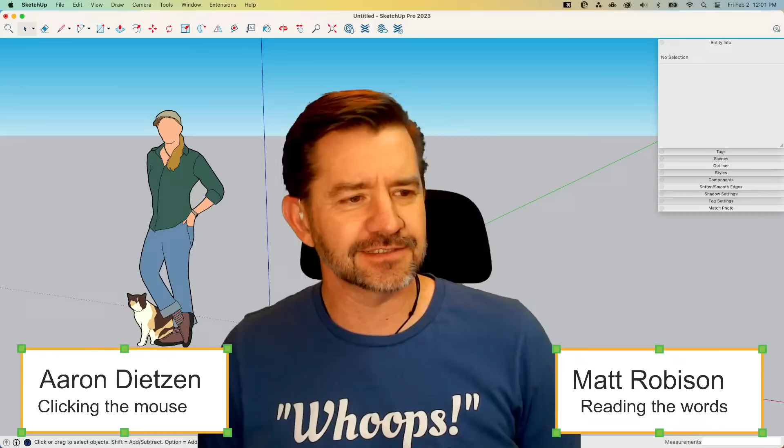We were just commenting how the first comment we saw come in was 'Hello from Madagascar.' I don't know why that staggers me, maybe because it's the movie, but Madagascar, that's pretty sweet. We've got Madagascar, Turkey, Syria so far. Let us know where you're coming in from. Iceland, my gosh, you guys are tuning in from all over. I'm coming in from Michigan over here. It's awesome, thank you guys for hanging out with us. This is gonna be fun.

We're gonna mix it up a little bit this week. We've been doing some architectural modeling, some interior stuff, some exterior stuff. Eric did some landscapey kind of stuff last week. So what would keep you guessing? We're gonna do some more entourage modeling, product modeling. We're gonna model an espresso machine, industrial design, product design kind of thing. It's an espresso machine.

If you saw the thumbnail before or the forum thread, you saw this ain't your regular espresso machine you might see out there. This is like a fancy one. It's got all kinds of shine to it, though I guess most of them are shiny, that's not the main characteristic. It's brass, very brassy. It's very cool and kind of ornate, like a statement piece. I feel like this would be a centerpiece of this coffee shop that Eric and Tyson have been working on collaboratively to bring together. I'm excited to see it come to life, it's gonna be fun.

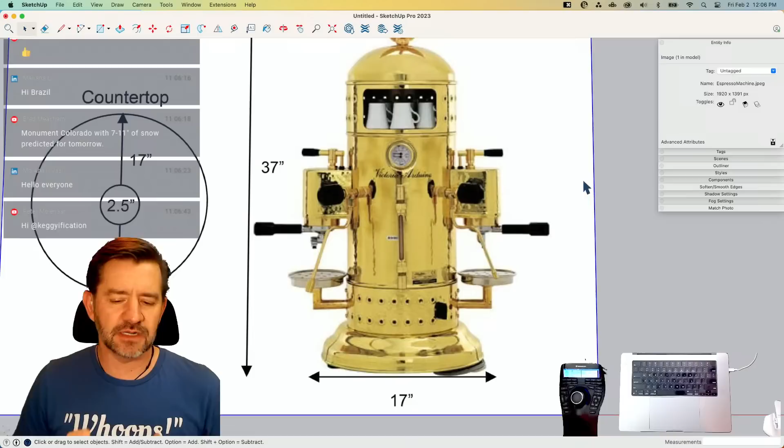The goal here - we talk a lot about level of detail, like how much detail do you need in a model? One of the biggest problems people run into when they start modeling is they start going to a super high level of detail, putting in circles with 999 sides, super fine minute detail when it's not needed.

So like Matt said, the goal of this piece is kind of a centerpiece - to have this piece be something that would show up and look good in a render. So we'll put this into the back of the coffee shop, and maybe Eric will go do some V-Ray renderings where you can see it real well from behind or from in front. We'll see, something like that.

But we want a decent level of detail because we want it to render fairly nice. It's not like a piece of fruit in a bowl on a countertop that's this big on your screen - this is actually potentially going to have some rendering done. So we want to go a little bit higher level of detail, but I do want to be conscious as I do this not to overwhelm.

So if you look at this thing, first thing, we've got a lot of round surfaces - awesome, that's cool, we can do that. We don't necessarily need every circle to have 100 sides, but we might want to bump to a little bit higher number just so we keep it smooth, so we don't get weird angles or chunky edges or anything like that. So that's something we're gonna keep in mind.

The other thing, I'm going to point this out up front because you guys watch this a lot - you probably know I don't do a great job of this. Usually I'm halfway in before somebody points out the thing you're modeling is symmetric, and I go 'oh yeah.' I'm going to do it up front this time - we're going to model half of this thing and let the other half just show up automatically. So there's some stuff that's not symmetric: there's this little pressure valve right here that's not going to be the same on both sides, and looks like there's a little switch or toggle right here that's only on one side. But for the most part, a lot of it is going to be the same.

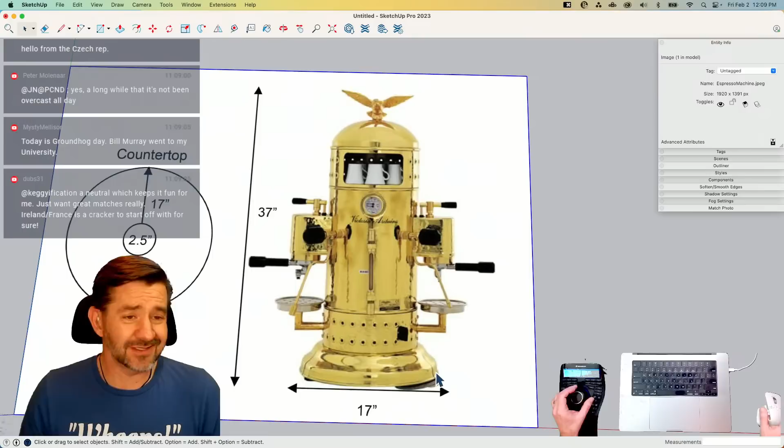I do have some dimensions here - it's 17 inches, I assume inches. Yeah, inches, the two little dot marks, that's an inch. 17 inches wide. I don't know exactly, but yeah, I'm not going to model it at that - I'm going to model it pretty big, so this thing's going to probably start out about people-sized, and then I have a number I can scale it to afterwards.

Again, this is not for fabrication, this is for rendering, so I'm not too worried about exact dimensions. I want something that looks about like this and is going to render well. So that's my plan, that's what I'm saying I'm going to do as of right now. Sound good? Everything good?

Modeling at somewhat of an arbitrary scale, just big enough to avoid not being able to create any small faces, and then afterwards you'll use these dimensions to scale it. You're not using like a scale factor of 100 or whatever, and then going back down.

Right, exactly. If there was some part of this that I was going to model, like if I knew the size of this copper tubing right here, if I knew that was a specific size, I would be more intentional about modeling to some scale. But really, I don't have any number. I don't have any clue what anything is, so I'm just going to jump in and make the shapes correctly.

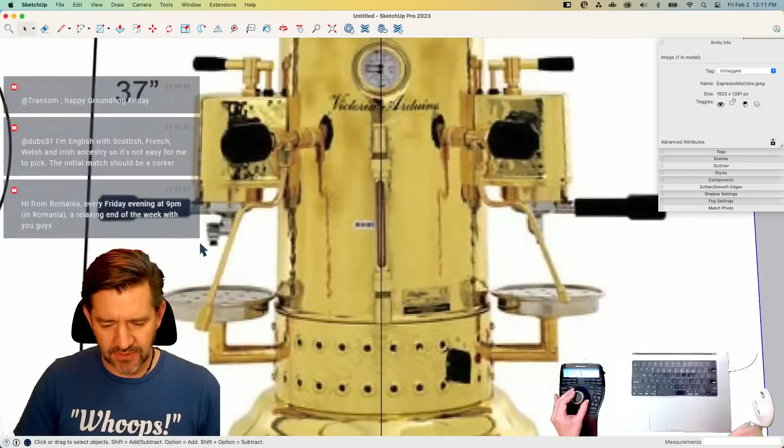As I come up here, it does look like maybe the image isn't quite straight. That's okay, for our purposes not a big deal. We're going to make a thing that looks a lot like this, and we're going to do it right now.

I'm going to draw half of a flat profile of this entire thing, and then we're just going to do a follow me, starting with the big overall shape. We have a lot of details to come in and add on here, so I want to get this main shape in right now. So I'm going to come all the way out like this.

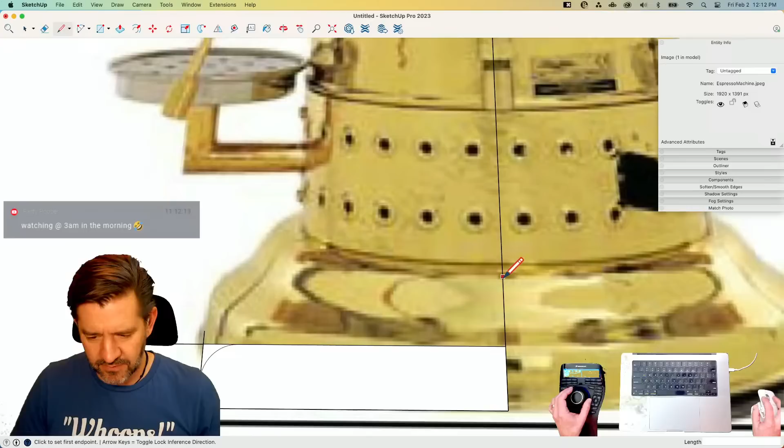Looks like there's this little rolled lip right here, so I'm just going to draw that kind of like that, and then it looks like it goes up a little bit. So what I really want to do is use these lines right here—that's kind of where this starts to roll down. See that? So if I go up like that, then I can put an arc in here, like that, and then that rolls up like that, and then it kind of goes in and rolls out again. Here's the top of that where it rolls back out again.

I gotta say, this is like pro-level eyeballing it. Oh, this is sometimes like when I do a follow-me profile—I think okay, I have a good idea of what this looks like in cross section, I can model this from the image. And then I do the follow-me and it looks completely wrong, and I'm like, oh gosh. But I guess that time could perhaps come for this particular base piece.

But we got time, we can make a mess for sure, but I trust you and your experience doing this enough times that you have a good idea of what it actually looks like and how to do it. Well, thank you, I appreciate your faith in me. Let's see what I can do to dash that. No, I'm with you 100%, no matter what happens—I'm one of the positive co-hosts.

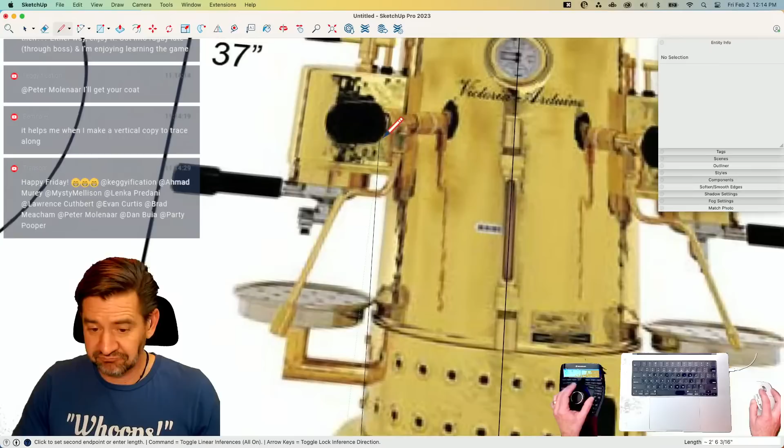I like that, yeah. People in the chat are saying that today is indeed February 2nd, meaning it's Groundhog Day. So happy Groundhog Day to you, Aaron. Thank you very much, I had no idea that was the case. Well, you're right, I don't pay attention—a bunch of people mentioned it, so keeping you up to date on current events, so you can have stuff to talk about at dinner parties over the weekend. Nice, nice. So you didn't even know it was Groundhog Day, so you probably don't know the result of Mr. Punxsutawney Phil's venture out of his hole. No clue whatsoever. Wow.

Does anybody in the chat keep up on Punxsutawney Phil over there?

If you're not familiar with Groundhog Day, it's a tradition in a specific town where they have a groundhog, a rodent, come out of his hole in late winter. If he sees his shadow, he's scared and goes back into his hole, meaning there's going to be six more weeks of winter. But if he's not scared, that means there's going to be an early spring.

I personally like Groundhog Day because there's still some whimsy that exists in the world, you know? I get what you're saying there. Outside of that is a lot of cynicism and facts. I went straight negative, I don't care for it immediately. Matt's more positive than I am, yeah.

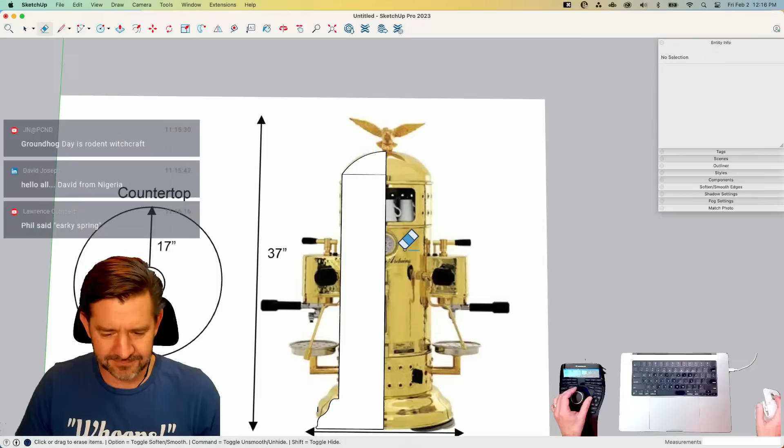But yeah, this kind of flights of fancy that still exist in small towns in Pennsylvania. Also, probably most people didn't realize that we have control over the changes of the seasons in Pennsylvania. So who knew, huh? Yeah, it's like whatever, germinating clouds so that it can cause it to rain or whatever. It's not that sophisticated, but still the same idea.

All right, so I got a pretty good outline here. This is, again, like Matt was teasing me about next level eyeballing, but this is what happens especially when you take a good up close picture of something that's 3 feet tall. This is parallax, right Matt? Where the tops and bottoms kind of tip away.

Oh, it's a P word. Parallax is like moving when you move laterally, left and right. Is that okay? I don't know, maybe it's the same thing. I don't know. I had one shot at sounding smart and I blew it. Sorry, I stomped all over it. It could be right, I believe you. No, I have no idea what I'm talking about. I honor my ignorance.

But no, when you do take a picture of something that's fairly big, stretches more one way or the other, you do get this kind of falling off. So I'm not looking straight at this. If I wanted to look straight at this, I'd have to pull way back and then zoom in to prevent this, so this was like straight flat towards the camera. So you can see I have this rounded part like this, and that just happens. That's how we see things.

But if I come to the very middle, what I was doing there is just saying okay, about here is where the top of that rim is, draw a line over. I created a grid where these changes were, I thought, and put them over here on the side. That's basically what I went to, and I'm hoping when I follow this around a circle, I'm going to end up with a bell shape at the bottom similar to what I got in the picture. As I come up here, I'm not lining up exactly because this picture's not perfectly square, but it should be fine for our purposes.

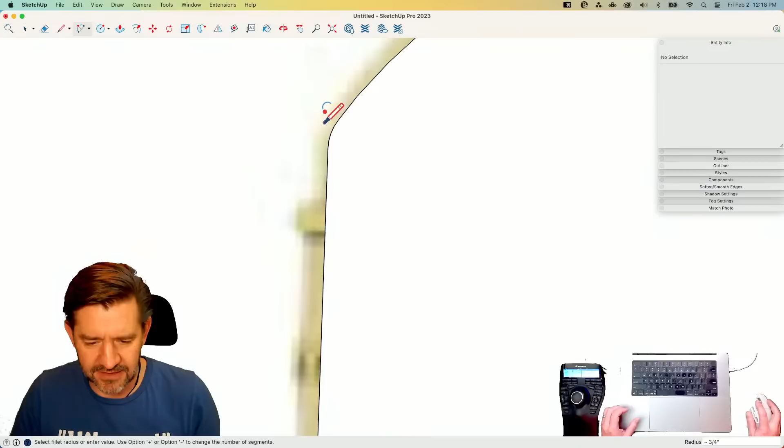I don't like this sharp corner right here, so I'm gonna make another arc. Default is 12 sides, I'm gonna drop down to like 4 sides, and just do a real tiny arc like that, just to take that edge off, so I don't have that real sharp transition right there.

The other thing I did was when I drew this arc right here, I put a reference line across like this, and that allowed me to pull an arc that was tangent to that line. That's real important, because if you don't do that... let's just recreate that same geometry right here. So I'm going to draw it again. If I wasn't careful about that, I could get something, whoops, let's go back up to 12.

I could get something like, oh, I think that's about right. If I spin that around a circle, it's going to be at a sharp point. And if I go up too high, it's going to create a dimple instead of a nice flat transition at the top. So just a couple tips if you're modeling that kind of geometry to make it look nice.

I have two sections here where the metal steps out. It looks like I have another little lip here, and inside of that a separate ring set in. That ring has these little dimple holes around it, one at the top and one at the bottom. So what I think I'm going to do...

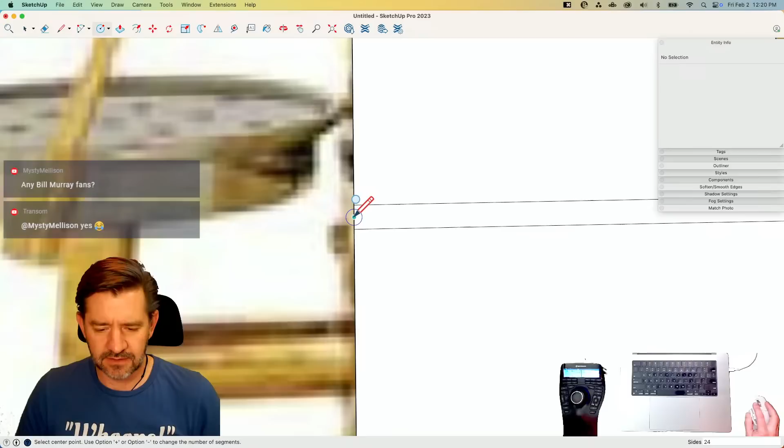At this point, I'm going to do this once so I can copy this geometry. I want to put just a half circle on there. When I do circles, I like to inference the middle right here, and then pull it up, and there we go. That simple. I can grab that, option copy it, drag it up, and stick it right here.

Now I have a question: is there any benefit to doing a circle and deleting half of it versus doing an arc in that situation? So let's try an arc on this side.

So say I did an arc, come like this, click here, and pull it out. There we go.

The only difference is in this case it's a little easier because I don't have other geometry getting in the way. But then I have to move my mouse just right to inference a half circle, whereas with a circle, I just click and then delete this line anyhow. So dragging across both is about the same for me. That's just the thought process I got into.

If I did want to do the arc, click here, here, and then bring it out to inference a half circle and then erase. So it requires being a bit more precise with the mouse movement. I can be a little quicker on the model by just clicking, but it's pretty close to the same, I'd say.

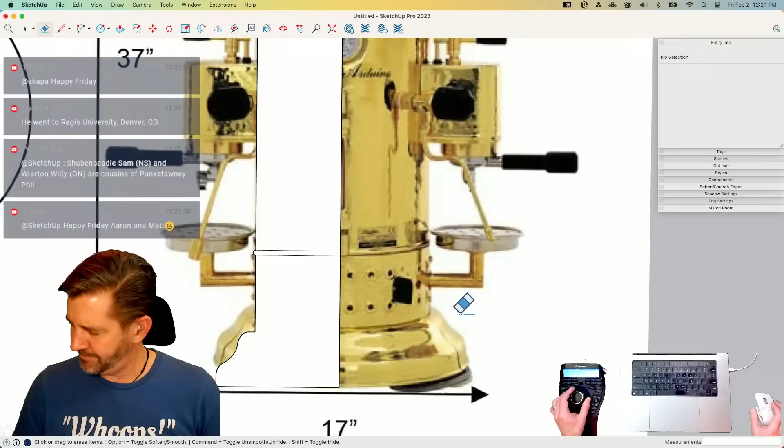Okay, cool, thanks for showing that. Absolutely. Two things: one person asked why you're not using X-ray mode to trace, or would you use X-ray mode to trace in this case? I'll let you answer that right after.

Shouts to Doug and Lawrence, who correctly said that Punxsutawney Phil did not see a shadow, so there's going to be an early spring. We haven't had winter yet here, so I'm not exactly happy about that. It was 60 degrees yesterday. February is supposed to be our coldest, snowiest month, and it was 60 yesterday. So fine, I guess we'll skip that. Who needs four seasons anyhow? You're already on to early spring. Phil's kind of cheating, he's just saying my prediction is that it's already spring. He's just refreshing AccuWeather and saying, okay, this is an easy one. Don't you guys have the app?

All right, so what I think I'm going to do: this section and this section, I'm just going to leave for now. I'm going to get the main body in, and then come back and replace this piece and this piece with different geometry. We've got to talk about how we're going to put these holes with the lips around them, but other than that, I think this will be the body of my piece.

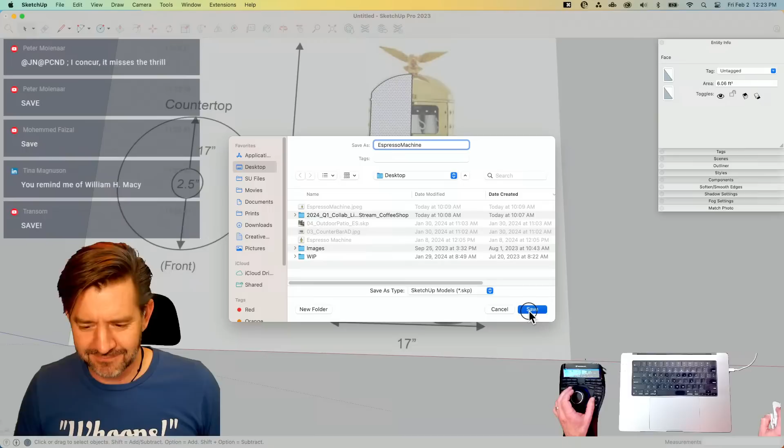He's a popular actor. Yeah. I'm just not sure I'd take it. I'll take it, I'll take what I don't know. Seems like a nice guy.

All right, put a circle right here. Now with this, like everything else I did, I used 12-sided arcs and 24-sided circles. I think that's going to be enough detail. But when I actually talk about taking this piece and bringing it around a circle, I do want to go to a higher number. 24 sides is okay, but when I blow it up to 17 inches wide, each of those segments is going to be like a full inch, so it's going to be a little too big of sides. So generally I try to use circles that are increments of 12, or at least of 4.

I'll usually use 24 as a standard. If I want higher density or higher detail, I'll go to 48 and then 96 — those are usually the three sizes I use. I use increments of 12 because they're divisible by more numbers than increments of 10. An increment of 10 is evenly divisible by 1, 2, and 5, but 12 you can divide by 1, 2, 3, and 4, so it's a lot easier to break up.

So just a thought — I'm going to try it at 48 because I want to keep it fairly light. I'm going to throw a circle down here... well, that's not where it's supposed to be. Let me try again, right here. There we go, and it doesn't really matter. So I'm going to grab that ring, say follow me, click this, and look at it a bit to see if that's the right level of detail.

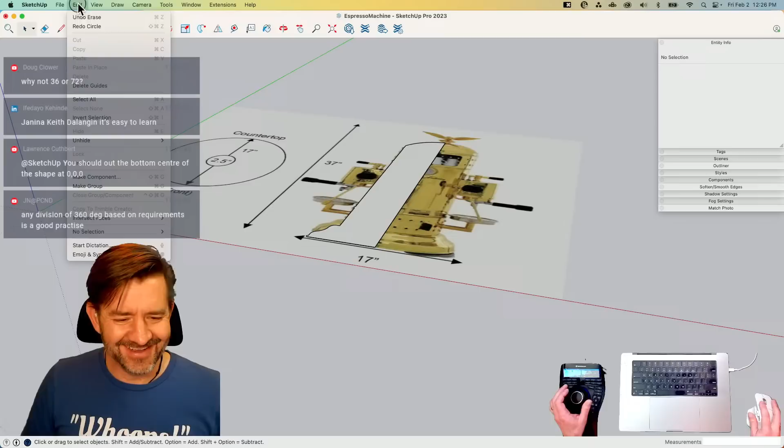So I'm going to hit undo — oops, or save. I'm going to save it, command S as opposed to command Z. They look similar, just kind of reversed, just backwards, yeah. I'm going to grab that circle — I don't have to draw it again. I can just come up here and say, all right, make that 96 instead, which is 2 times 48.

Now I'll try again. I'm going to grab that, follow me, click here. Look at that — that looks way smoother than it did before. So I like that, again, if it wasn't the whole body.

The other thing about this is we're going to put something shiny on here, and I guess I should defer this to Eric because he's the guy who does the most rendering. I feel like with shininess, issues like that stand out a little more.

All right, I can get rid of the circle, and I can take this and shove that over there.

Are you watching the preview, Matt? The preview, what do you mean? On Restream? I have it up at this other window, and it just jumped back to like the first couple minutes of the stream. Oh, it's still working here, right? All right, it's just me. It's still showing me the live view. Okay, just me, just causing problems. All right, so now... yeah, let us know in the chat if anything goes wrong, but I think everything's good. Still right, as is, yeah, as expected. 30 minutes in, and we got this. Uh-oh.

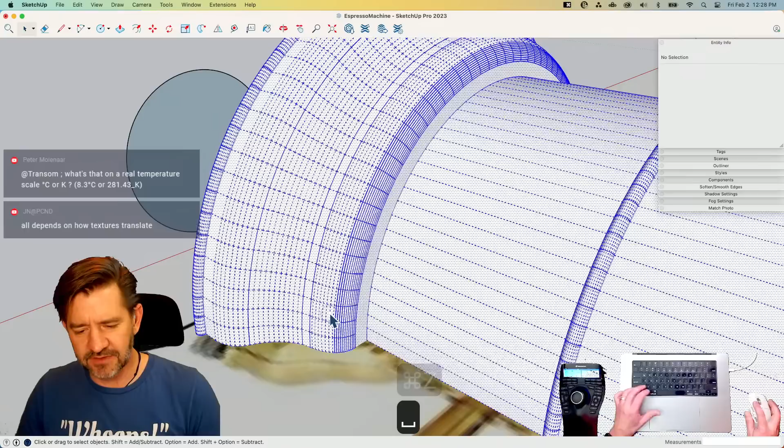I jumped, let me undo a couple times. All right, so see this right here? This is showing that I didn't have some geometry welded. It would be easy enough to come in and erase some of this stuff, or triple click and soft and smooth it, but I am trying to do this as correctly as I possibly can. So I'm going to come in here. How many undos did I do? Too many. And I am going to do some welding.

So I want pretty much everything from here to here to be a single curve. All I have to do is select it, right click, say weld edges. Now if I click off of it and grab it again, I should get one continuous curve. So when I come here, select here, follow me, click here, and spin around — there we go. That's nice, see how it just looks like one big piece.

That's what I want. I didn't have to do that for these because they're already individual curves. Same thing up here — oh, I did get that one I missed, so undo one last time. Let's select that, right click, weld. Now we have one curve up here, one curve down here — now we're good. I can select this, follow me, click here. All right, that's what I wanted. Perfect, okay, nice.

And save. All right, slide this over here. I think the rest of this is going to start going pretty quick. I just got to stop. I got to talk less and model more.

So I'm wondering how many holes I want to do this section here. This section and this section have these series of holes going all the way around. So if I count, 1, 2, 3, 4, 5, 6 - say there's 24 sets of holes all the way around. That's what I'm going to go with.

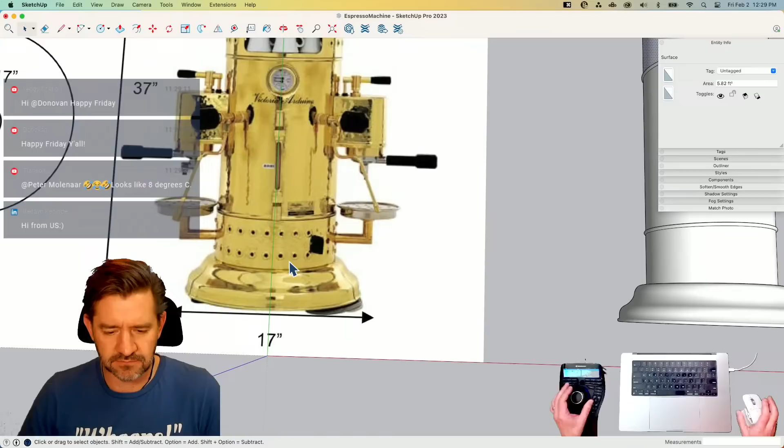Drawing holes onto things can be a little difficult. The reason is when you draw a hole on something, you need to draw it onto a single face. If I go view hidden geometry, my single faces are pretty small. So I'm going to just draw a circle right here, inferencing about the middle.

Pull out to about where the circle is, and then do another one, pulling out to where that lip is. I'm going to grab that, make it a group. Now I'll grab it by the center, bring it over here - I'm not actually placing it, I just want to use it as an inference. You can see when it's on the center, it almost perfectly fits inside of 2 sections.

That's actually kind of good to know. That's really good to know. So what I'm going to do is have that hole pierce 2 pieces.

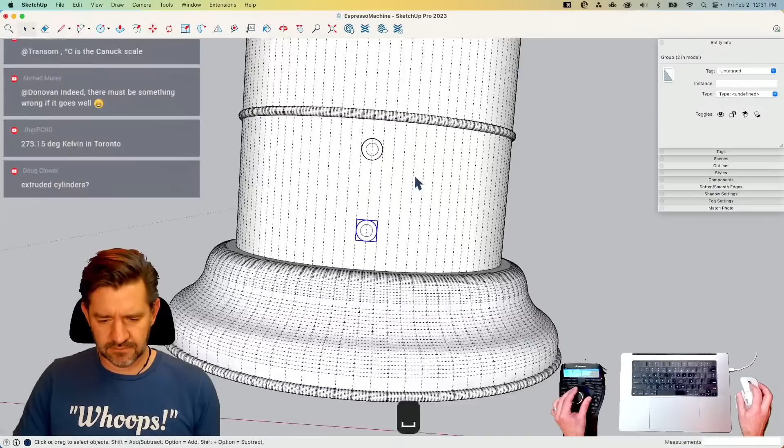Let's see, I'm going to move it up here, a little lower, and step back with that. Down a little bit more. All right, so it's not where it needs to be right now.

It's a little bit off - it's right in the middle. You can see here if I look at my middle line, let's move it so our origin line is right about in the center. So pretty close, it falls on either side. That means what I'm looking at right here actually needs to be hitting right here, 2 segments over.

So what I can do - let me think of how to do this. I'm going to grab those 2, use rotate, find that center segment, and just drop a line straight down. That didn't work, it didn't go straight down, it came straight out.

All right, so if I grab these 2 now and rotate from the middle of this, I go from here, option - I'm copying it for right now. I'll get rid of the original. I think that works.

And here's what I'm gonna do. I'm making this up - like I'm saying these things as if I have a plan, but I'm not really sure what's happening just yet. I think I'm going to isolate this into its own group, come into that group, and make this into just kind of a dowel sticking out.

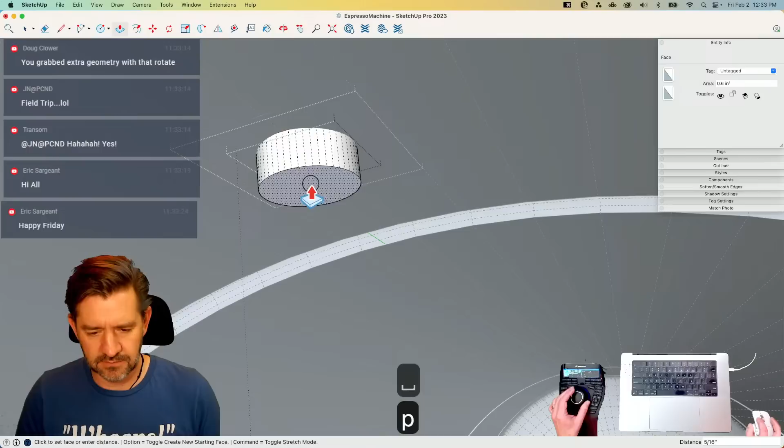All right, that's going to work. Except I want to separate this, so I'm going to grab this circle and make it a separate group.

And if I'd made this a component - somebody should have said this out there, maybe they did - I should have made that a component first because I would have only had to do all that once. Now I can grab both of these and explode them. Now I have separate 2 dowels and 2 ring shapes. I'm going to come back to the ring shape later.

Right now, I should probably triple click this and make it a group. And let's see - if I come into this one, hide the rest of my model, select these 2 faces and say intersect face with model, I should get that.

And now I can take just those 2 circles, rotate from the middle, go here, option, every 2 - it would be every 4, and say 23 times.

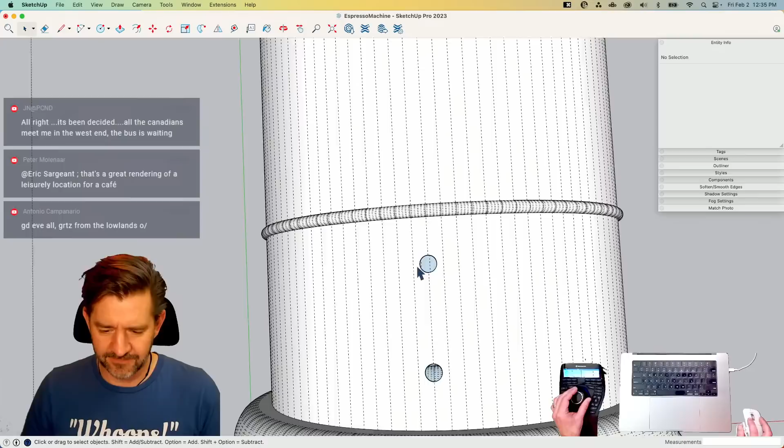Let's try that. I'm going to do some precision selection. Shift. All right, so now I have just those two circles.

Nothing else selected, double check inside. Okay, let's try rotating that. So we're going to go from here. Option 1, 2, 3, 4. 23x. All right, I think that did it.

So if you copy a circle onto a single face, it will cut it, and you can potentially not have to come around and delete this stuff. But I didn't do that, I copied it onto a break. So what I could have done, and I'm just thinking through stuff as I go, is actually copied these two faces and just copied them around.

Then I wouldn't have to come in and delete this geometry, but I didn't do that. Sometimes my modeling muscles go quicker than my thinking muscle, which is what I like to call my brain. Yeah, sometimes I just go and do stuff, and then afterwards... have you been here before? I'm not explaining anything new, you know what I'm talking about. Whew, stop, coffee break. Yeah, totally.

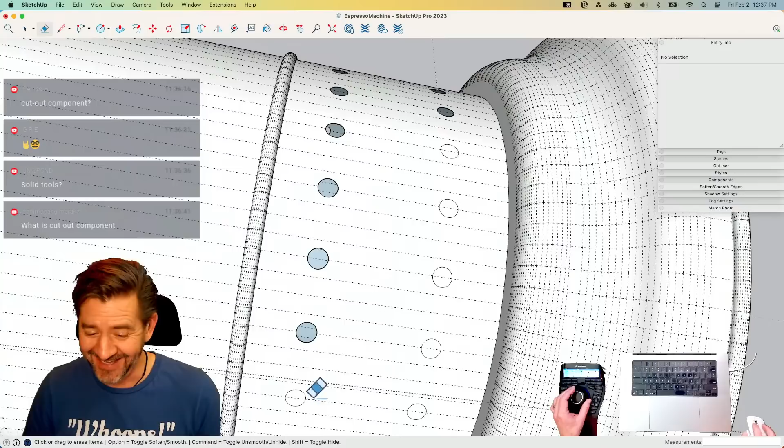Speaking of that, I know you kind of had plans early to do this as a half of a component. Oh yeah, I don't know if that's still coming, or if that's the plan or not. Hey, that was in the plan, you're absolutely in the driver's seat, so that's up to you. Yeah, I was going to do that right now. I was not going to do that right now. Thank you, Matt, now's as good a time as any.

Yeah, okay, so how do you go about breaking stuff in half? We did a video a while ago talking about splitting things in half.

I could do this a couple different ways, because I could come in and come up with a cutter to break this. This is a symmetric thing, right? The geometry already exists. So what I would be tempted to do, rather than creating a cutting geometry or anything like that, is just to kind of do something like this and just brute force chop it in half. I think it's kind of fun, it's kind of like reverse stitching.

But this way I can actually just come through here, erase what's on one side. All I'm really looking for here is a good solid break. So if I erase one segment all the way across like this, then I can actually, after I'm done, just do a quick select and then erase half of it real quick and easy.

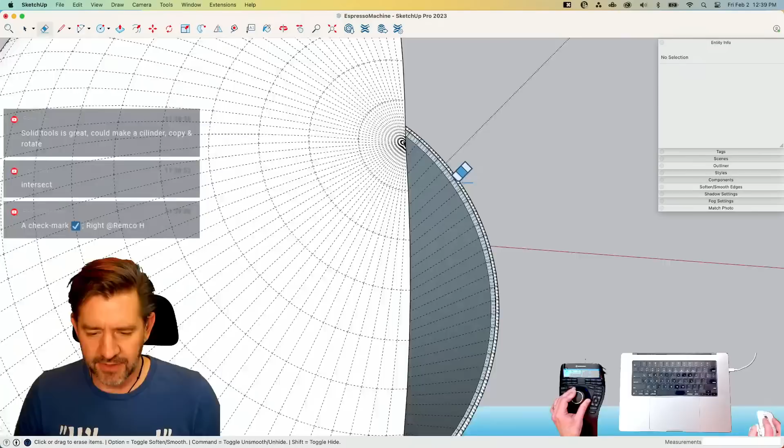But it kind of became apparent to me that I don't have this set up as a solid, I'm modeling this like it's made of sheet metal. So yeah, that would have been a thing if I had done this whole thing differently, but instead of doing it differently, I did it like this. Yeah, that would be an alternate reality, an alternate universe where, you know, the groundhog did see his shadow or something. Totally different setup over there. I got a little... that was a face that went straight across.

I got some weird stuff going on with my mouse right now. Help me.

There's a teaching opportunity, hold on, I just saw a thing happen I want to talk about. I'll finish this first. Nice. There we go. So you guys are in for a treat for learning here. That's right, because this lip went all the way, this is one solid face all the way around.

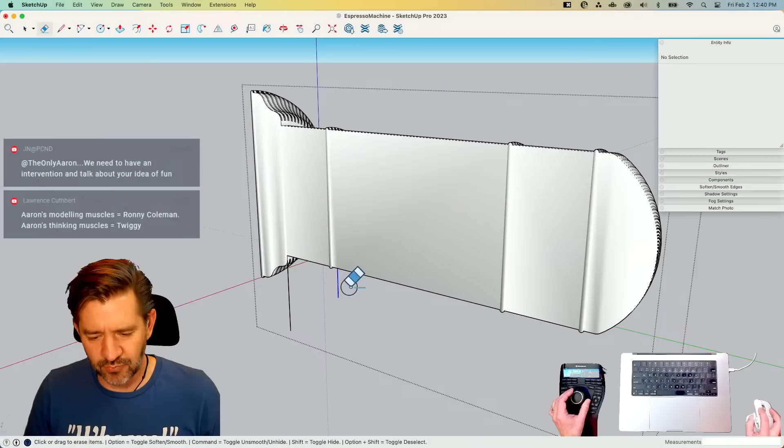So when I erased that whole lip because it was horizontal, it's a flat piece right there, but easy enough, quick stitch. There we go. And then this may happen to you at some point in your modeling lifetime: these weird phantom shadowy things. This is a flat piece, this is a single flat piece.

But SketchUp's putting these weird shadows on here because these edges right here are smoothed, which is not how they should be. They shouldn't be smooth, they're a 90-degree angle, it should be a solid cutoff. It causes issues on both sides. See this dark shadow here, and then these weird shadows here. When this happens, the easiest solution is to just select it all, go to soften smooth edges, and then just toggle it off and back on again. All right, and then let's get rid of our geometry.

All right, there we go. That is half of an espresso machine. All ladies and gentlemen, that is half of an espresso machine. Applause break, thank you very much. Good night. All right, let's put these little lips on here.

So this is going to be weird, I'll be honest with you. This is going to get a little bit weird. I'm trying to think of how to do this. In my brain I'm going through solutions, and I know the solutions I'm coming up with are going to make this longer and more steps than they need to be. But I just feel like I got to go. I got to be me.

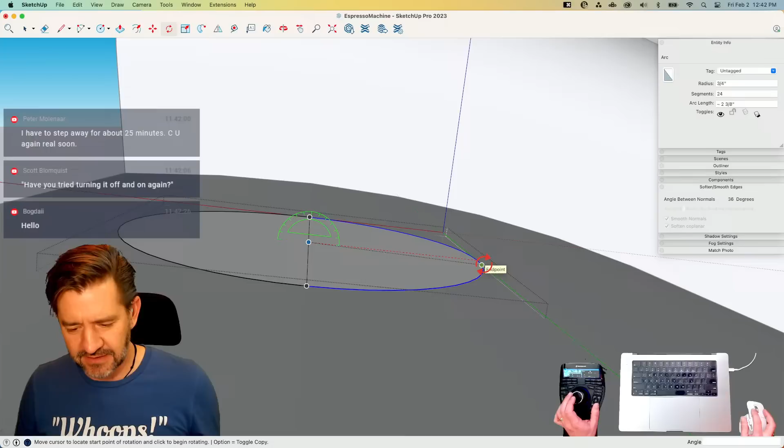So buckle up, because we're going to probably spend about 5 minutes on a detail you will hardly be able to see in the final render. I'm going to break this circle into 2 pieces. I'm going to grab one of them and rotate it down to the surface. I'm going to grab the other one, same thing, rotate, grab it, drop it down to the surface.

All right, so right now I have one path, and it's a circle that breaks like this. So what I'm wondering if I can do is, if I go right here, draw half a circle like that. I'm curious if I grab these two and say follow me and click this.

Well, sometimes things actually work extremely well, and okay, that was way easier than I thought. I mean, of course, yeah, just like that. Duh, what else would I do? Okay, should have never doubted yourself. Yeah, I knew that was going to work out.

Great, there we go. Here's a question for you: would you want to make that a component if you're going to copy it around this, or no, because of how you're... Yeah, that probably makes the most sense. This is, everybody knows, what's called a rivet round over. Yes, that way, yeah, that way it is a component. I mean, honestly, component-based modeling is probably one of the smarter ways to model when you can.

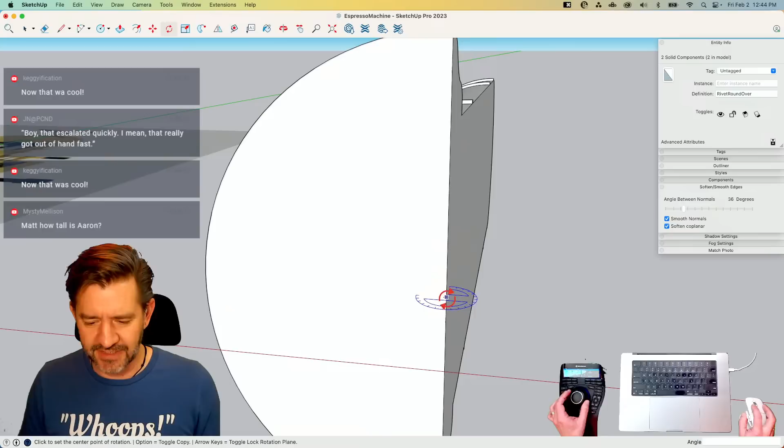I think a lot of times I end up using groups, and it just ends up being because of laziness. There's not a really good reason to just use groups. Even if something's not going to be used multiple times, it probably still makes sense to make it a component.

All right, so I'm going to copy both of these from the middle point. I'm going to use this middle here, and say option copy that to here, and say 11x. No, yes. Boom, and like that, nice, we got half of it. Bada bing, boom. I'm going to grab all of those and just copy them from here. Option, drop it right here. Sorry, go ahead, Matt. No, beautiful, nice and easy, just like that.

We had a question in the chat, I wonder if you can answer. So this coffee maker is 37 inches tall, how tall are you? I'm approximately 2 coffee makers tall, give or take, like an espresso cup shorter than that. Put a little espresso hat on. I'm around espresso-cup-6'2"-hat, something like that. Right on.

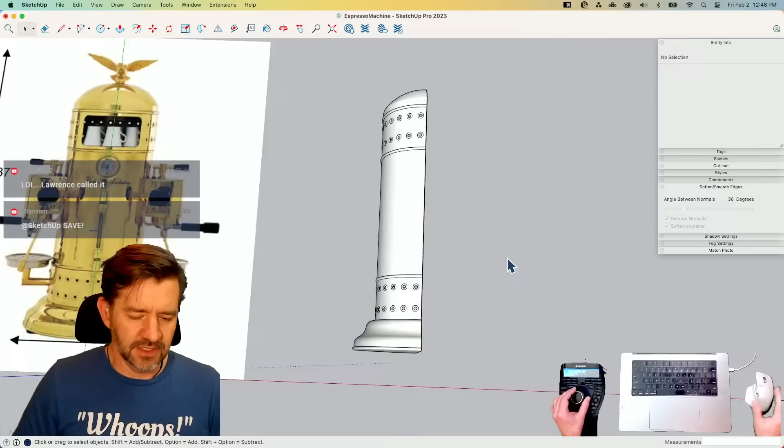Nerman here says, add more cut lines between the holes so you won't have smoothing issues between the holes. Do you get what that comment means? Processing. Cut lines between the hole here to here. Yeah, I guess I don't understand what Nerman's getting at. All right, well, right on, hit us up with some more details, Nerman.

So this top section actually has a space in it that cups go into, and it looks like 1, 2, 3. So I'm going to rough this in here. This comes over to about here, something like that, with some rounded corners. I'm just going to do an arc around one of these corners, double click, and then double click here. Take that, and I'm going to pull it down. Oop, actually, nope, hold up, back up. First I'm going to select everything, select these two, take that, weld it, and then pull it down. That way I have one piece right there. All right, once that's done, I'll pull it up like that.

I'll come in here, hide the rest of my model, select this, intersect face with model. Pick that back up, get rid of this. Should have put cut lines in there, and then that would have cut properly. Apparently, maybe, no, yeah, I'm still just working on it, kidding.

Still working on that. Did Nerman ever get back to us with the details of that? Not just yet, you guys know. I have no reason to doubt Nerman. I don't know Nerman, but you know.

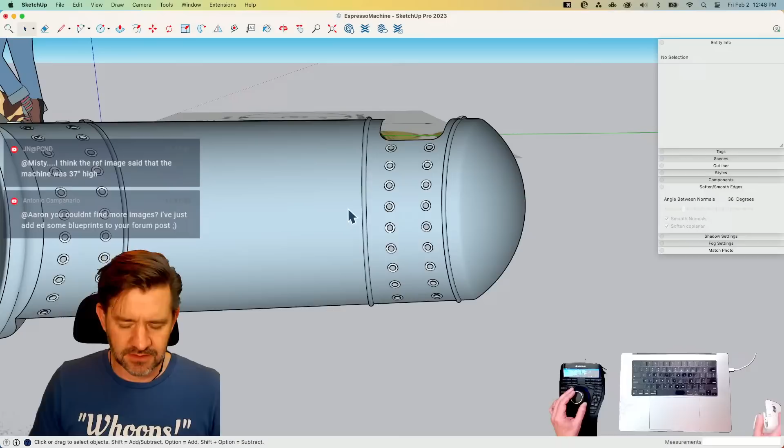All right, I think the body's done. So just to make this easy to render, I'm gonna do a thing. I kind of want to do this as a separate piece. I want to put something on the inside here so light or whatever isn't coming in. Obviously this is going to be open, but it would be nice to have a back face, which won't have the holes in it. I'll have to think about that. Actually, no, I'm just going to keep this simple right now.

I come in here. Yeah, that's all I'm going to do for now. All right, so then the other thing we do is I can take a copy of this, flip it with the option. There we go.

And I have this ugly line right down the middle, of course, so I'm going to come in here and do like that. Then I'm going to try—what I want to do, actually, I'm going to undo that. Put that face back. I'm going to double click.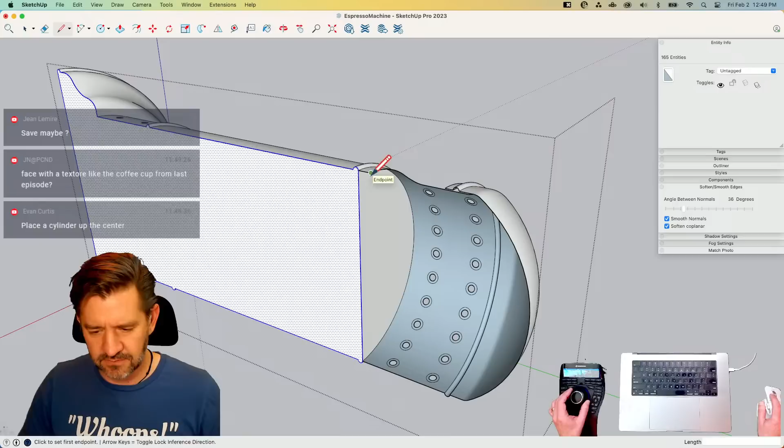Need the same thing here, so go like this. Temporarily I'm going to close this up. Double click, and then right click. I'm going to say deselect faces, and hide them. There we go. I'll delete this and this. And what that does is gets rid... did I not make that a component? I didn't. All right.

All right, now let's try it again. Now we're going to copy it over here. Right, I don't have anything to snap to anymore because I just made all the faces invisible. Oh, come on, man. I'm just copying it over here. And I'll use the corner of this. Still don't have a line there, do I?

Let's see, Antonio says they dropped some blueprints into the forum thread. So if you're looking for any more detail on a specific piece, looks like there's like 4 different exploded images of the different pieces in case you're looking for more detail. That's a good find.

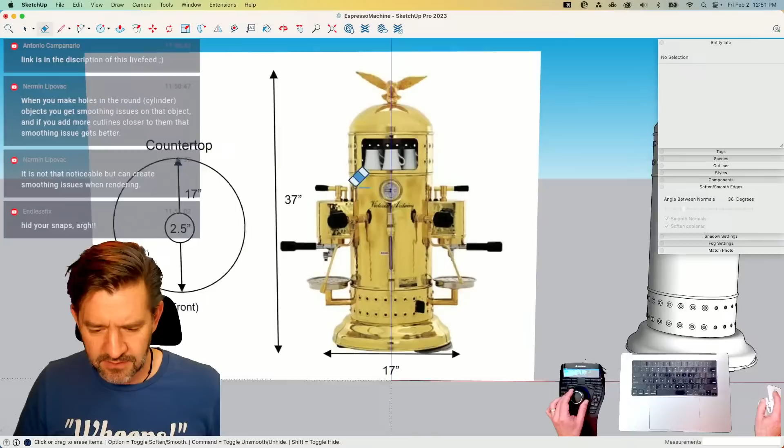Sounds like somebody's trying to push accountability on me. I fear it. Yeah, I never saw any plans or anything like that, I just modeled it as I saw it. Yeah, got a nice exploded view. No, that's great, I appreciate that because I was kind of wondering about these chunks sticking out. I didn't really understand what— all right, sorry, here you go. And it's hard to see what's going on behind there and everything. Right, so I got these things sticking out, I didn't know what they looked like, but that exploded view does show a better view of what that is.

I'm a little confused because it looks like in that render, something's sticking out here that I don't see, but maybe there's different model types.

All right, I'm gonna keep moving. Oh right, yeah, this one is the 3 spout version or whatever you want to call it. Right, that makes sense, and the one you have is the 2.

So hey, I'm not trying to show off. Okay, I'm okay with having the 2, it's okay with me. Sorry, I'm sensitive about that.

All right, here's how I'm going to do this. So I have a front view of this shape. If I just take those 2 shapes like that, I'm going to slide it over here so there's nothing covering it up. That kind of shows me about where it's flat and about where the arc is. Then I should be able to take this piece right here, rotate it this way, rotate it this way, and that should give me this geometry, and it should give me that.

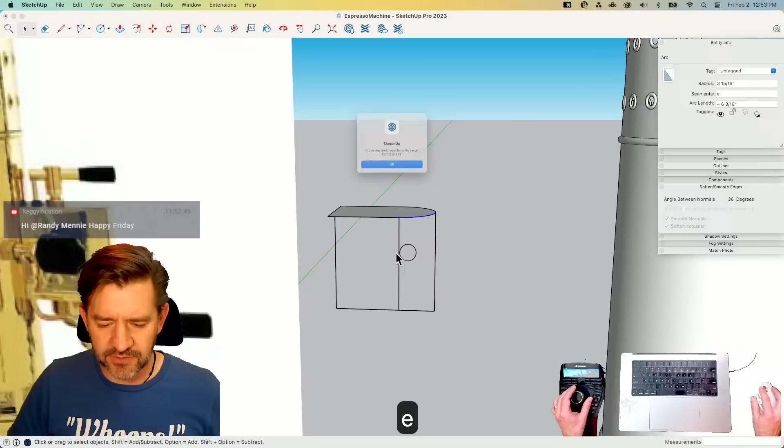I'm going to increase the number of sides on these 2 arcs. Take that up to 12. Take this up to 12. You can always change the number of sides on an arc or circle until you push-pull it. As soon as you push-pull it and make it into 3D geometry, it's not so simple to clean up. All right, so there we go.

I could take that and put it on the model, but I want to go a little further. I'm going to get some of the rest of this stuff on here, and then we'll drop it into the model. So I'm going to go ahead and make this into a component. And this is, of course, the coffee drippy bit.

Sorry, guys, I apologize for Matt snickering right there. He's not the technical type.

You're obviously the coffee snob because you know the technical term for that. Mm-hmm, that's right.

Real quick, just to close the loop on this: Nermin was talking about stuff that has to do with rendering, so smoothing issues on an object that come about when rendering. But Aaron won't be rendering this model, so maybe that's Eric's problem, and he'll have to deal with the cut lines at a later date. That's a great point. I could really be playing this like, how do I make Eric's life as difficult as possible? I haven't been thinking about it that way. Thanks for calling that out, Nermin, I appreciate that.

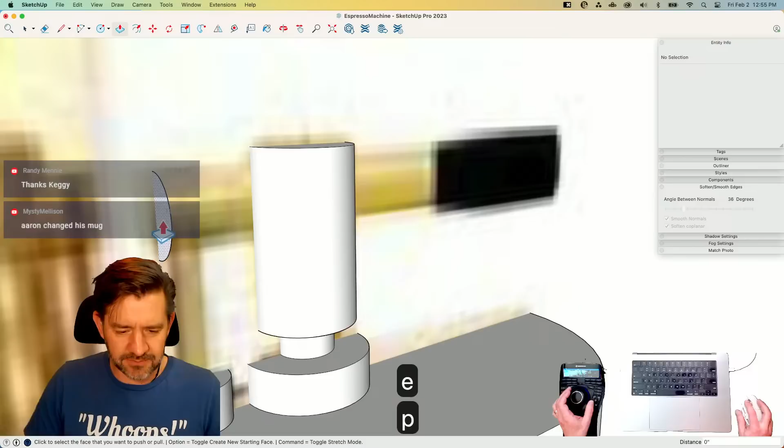So I'm just throwing some geometries in here, kind of quick. I feel like this looks like it tapers, so I'm going to bring this out like this, grab this outside circle, scale it around the middle, and bring it out like that. And then I feel like, I don't know.

At this point I might just be creating geometry and details, but it's pretty quick and easy. This method of modeling is something our good buddy Tyson is really good at. One of the first SketchUp videos I watched was Tyson modeling - I think it was a telescope - and it was just basic geometry, push pull scale. It was an amazing way to get geometry in quick and effectively. Especially when you're putting in details, the closest we'll be to this geometry is probably about this far away, so I don't need to do a whole lot more detail at that level.

Yeah, that's a good point. Speaking of, I know this is going to be rendered, and you made the circle of the main shape 96 sides - did you change the number of segments for those other circles, and if so, how many did you make those? I believe they are 48.

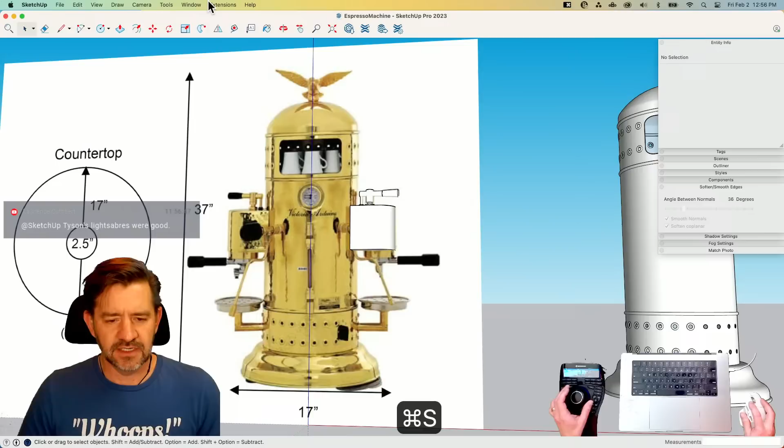Again, let's see - I'm going to go ahead and save. If I look at my model info right now, yeah, we're at 60,000 faces. So that may be getting a little heavy, I don't know, we'll have to see as I keep going.

And I know something people do for rendering, especially metallic stuff, is beveling too. I don't know if that's something somebody else is going to handle, or - no, that is a great question. Something I had not really spent much time thinking about yet.

Nice, well don't let me throw off your train of thought, you keep doing you. I will just keep my thoughts to myself.

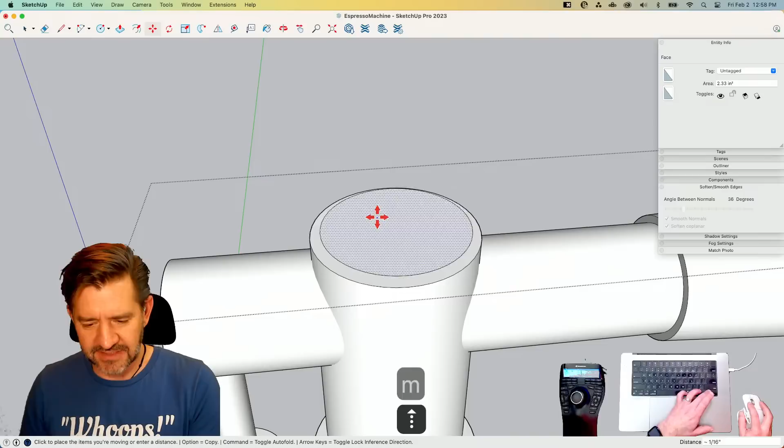No, but seriously, I'm looking at this - so yeah, some of this stuff might get beveled, some of these pieces, but not a whole lot, depending on it's pretty round already. So one thing I could do is come in here, grab this circle for example, offset it that much, and then raise it up the same amount that I offset it, which gives me that kind of look - actually pretty noticeable when I look at it, that's probably a little too much. I should probably do about half that. So I'll do an offset of 1/16 of an inch, then grab this circle and move it up 1/16 of an inch, which gives me that little, not sharp, metal look.

That's a great point, I'll do that on this side too. And then this one - this looks like it was black or something - and we'll move it up again, a 16th.

Yeah, I remember watching one of Chris Rosewarne's videos from a previous base camp, and he said whenever he goes from concept to render, he basically bevels everything, because nothing in real life is exactly 90 degrees, or very few things, I should say.

No, but now you're introducing a bunch more geometry, so if this model's too heavy, you can blame me. Eric's going to watch it at some point, so he'll know whose fault it is. I did see his name pop up in the chat earlier, so maybe he's just lurking, keeping an eye. The watchful eye, the watcher. Accountability.

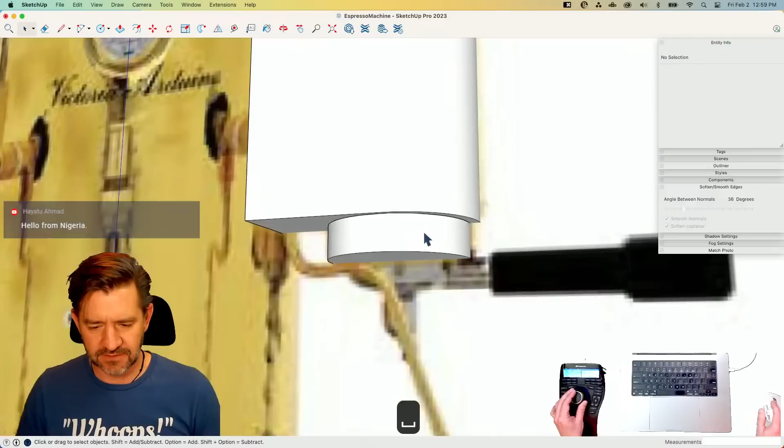Yeah, so we'll probably do that. Probably makes sense on this piece too, this big old chunk right here. I won't spend too much time doing this, but yeah, I do that. My apologies to everybody in the chat who now just has to watch him offset and move every single piece of geometry he already made. But hey, in for a penny, in for a pound. That's what they say. So, very good.

You folks got plans for the weekend? I know it's Friday, so most people have a weekend coming up. Any big things coming up? Any plans? Any fun things to kick back? How about you, Aaron? Anything of import? I feel like I say this almost every week, but I want to not do much this weekend. I'm really, really hoping I can follow through. I'm not very good at not doing much. That's not my strong point, not my strong suit. I'm not really. That's not my thing. I tend to fill my time up. Well, it's good to have something to strive for. That's right. Isn't that what they say? That keeps the human spirit alive or something. I don't know what I'm talking about. I buy that. It sounds like a thing somebody somewhere said at some point. Sure.

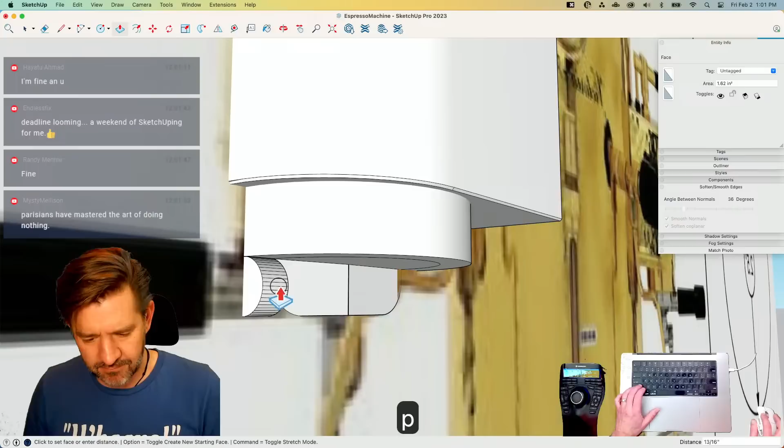Endless Fix says the deadline is coming up, so a weekend of SketchUping is in their future. Could be worse things, you know. Sometimes I like having deadlines because you have something to work towards. But I guess working on the weekend's not really fun, so sorry to hear that. That's also true.

I don't know why, but I can't. Oh, what the? All right, we got to back up some steps here. What the heck happened here? Huh, my face got broke. Somebody broke my face. There we go. All right.

And I have, I'm gonna do this. I'm gonna circle. I want to not pull this out to the edge. I don't want this to merge with this geometry right here, so I'm going to come up like right there instead, a little bit smaller. There we go. All right, I'll offset that.

Why is it only offsetting half? Rookie mistakes here. Who's paying attention to this guy? I'm certainly not, I appreciate that. I'm just doing my own thing over here, so redo. All right, I didn't get rid of this line in the middle, so I only extruded half my circle, which was pretty well unacceptable, and I am ashamed.

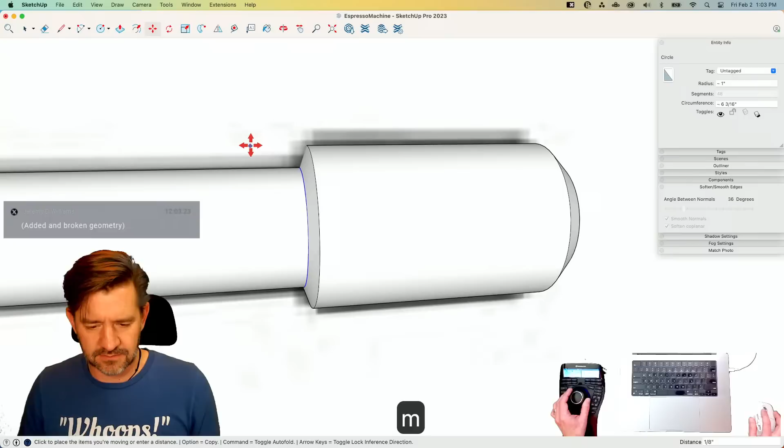Like that, I'm going to pull it just like I did before to make this handle. Pull it out here, and then we'll go offset up to here. Pull that out to here. Going to close that out and then pull that like that. There we got it. I'll probably do the same thing over here just to make this a little more aesthetically pleasing.

Yeah, this is all coming together, aesthetic and ergonomic too. I mean, baby, you got a handle going. That's right, you got a handle on that model.

One thing real quick, looks like Jeremy says, does the SketchUp team ever plan on replying to my bug concern posted over on Twitter? I would say post that question on the forum. That's probably your best chance of getting a valuable reply. That's what I have to say about that. Yeah, I would say that if you ever have information you want to get to the development team, a team that Matt and I are not a part of, just FYI, let's just be real about where we are. I have no idea what this little spout thingy looks like, by the way, so mine's going to look like this.

But anyhow, that's separate from what we're talking about.

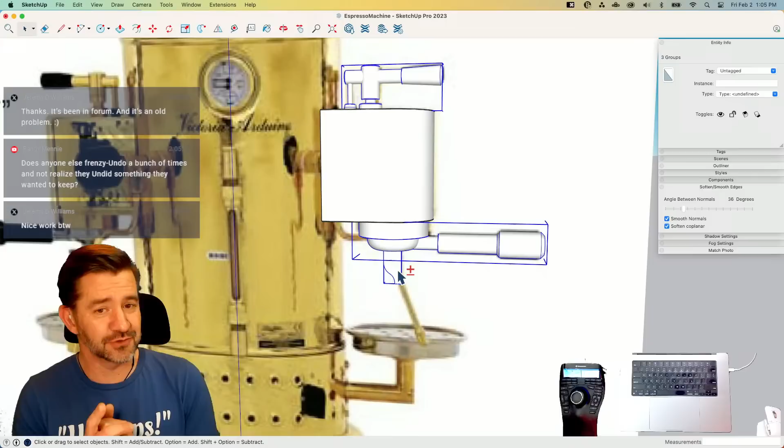Randy is saying, in relation to making a mistake and undoing a bunch of times, can anybody else relate to this, where you undo to try to go back before you made a mistake and then accidentally undo something you didn't mean to? I can definitely say I've felt that before. Been there, and honestly that's not just a SketchUp thing - undo is one of my top commands regardless of the software. Yes, muscle memory, a lot of mistakes.

All right, we don't have a whole lot more. We're at 1 o'clock now, and this is feeling pretty cool. We don't have a ton more detail. This is the steamer - a steam spout, the steam handle, and the whole steam assembly. And this isn't coming straight out the sides, it's actually coming out from the center.

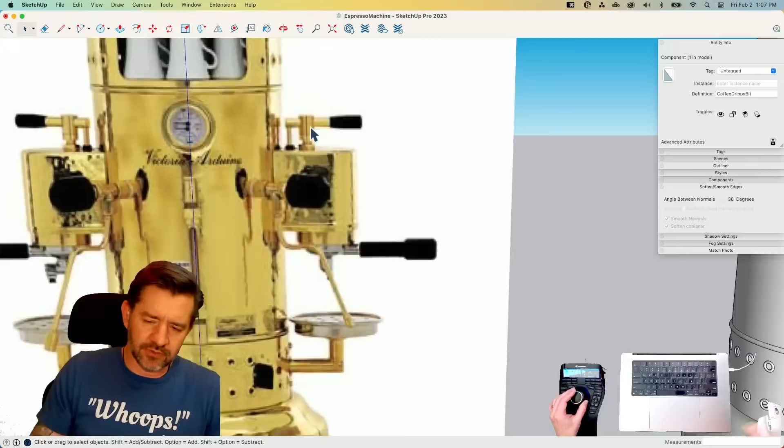What I think I'm going to try to do is model it flat in plane, and then bring it over and rotate it out. I just brought this over - this isn't in the component yet, that's why it's only on that half and not this half. So I'll bring that into the component in a second; I want to do it all at once. I'll get this made and then this piece right here - I'll start with this piece first, actually this is a little easier because it's on the side.

So I'm going to draw a line from here to the center and then go up like that. Then I can grab that and say follow me there, and that makes that nice 90-degree angle automatically - I don't have to mess with that at all. And I can take that top circle I created, re-weld it - not sure why it got broken, but weld it - and then offset that out to here, and then offset that again.

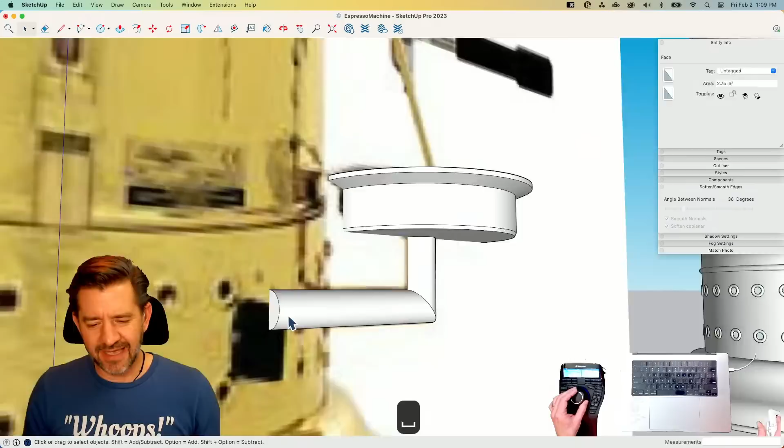One thing you mentioned about steam earlier - the innovation of this particular espresso machine was the vertical orientation, which allowed for a longer boiler, which made for a creamier espresso, a creamier cappuccino. So it was well sought after for the creaminess produced by the verticality, my words, of the boiler inside this machine. In case anybody in chat was wondering, or you, Aaron, were wondering - I was like, man, there's a lot of verticality in this, why do they go so high? That's crazy.

Antonio had a question about why not group only the part you're working on. I don't know if he means why would you not make this geometry a group before you start working in it, or something else. I'm not answering right away because I feel like that's exactly what I'm doing - I do feel like I'm grouping just the part I'm working on. Maybe the question is why I'm doing it that way.

It seems to me like the question is why not make a group before you draw the geometry, the idea being it's bad to have loose geometry around, so you should maybe always be working in a group. Not exactly sure. There's actually - sorry, I just realized my dimples here - I'm going to cut those and put them in context so they show up on both halves. Context is everything, that's right, context is king.

When I'm doing this kind of parts modeling, I tend to model my geometry free-form and then put it into a group when I get to the right point. You can absolutely start with something already in a group and go from there instead.

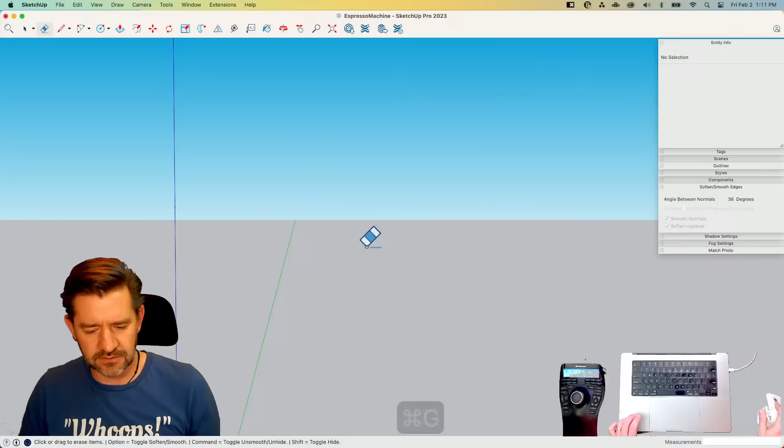So if I wanted to, I could hit Command G. Wait, is that right? No... seems like that's the right thing. Delete all, make group? Just kidding. Oh no, whoops. If I say make group... oh, it's because I have everything turned off.

So I could come in right now and start drawing, and now I'm in a group from the get-go. So that is a way I could do it.

Like I said, I just tend to not do that, I don't know. I think some of my modeling habits have to do with the fact that I've been using SketchUp for years, and I do stuff because that's the way I learned it. I taught myself, like a lot of people are self-taught and have their own workflows, and I think some of that is just because it's my workflow. Not saying that's necessarily good or bad, but it could be that.

That's a good question, and I unfortunately can't say I really know exactly why I do what I do sometimes.

If you've been doing it for as many years as you have, you always remember to make a group afterwards. So you never run into the possibility of overlapping geometry sticking together, because you know that after each piece you're going to select all, make that a group, and have it in its own wrapper. But other people might finish something and just forget to put it into a container, and then afterwards you're going to get into trouble. Sure.

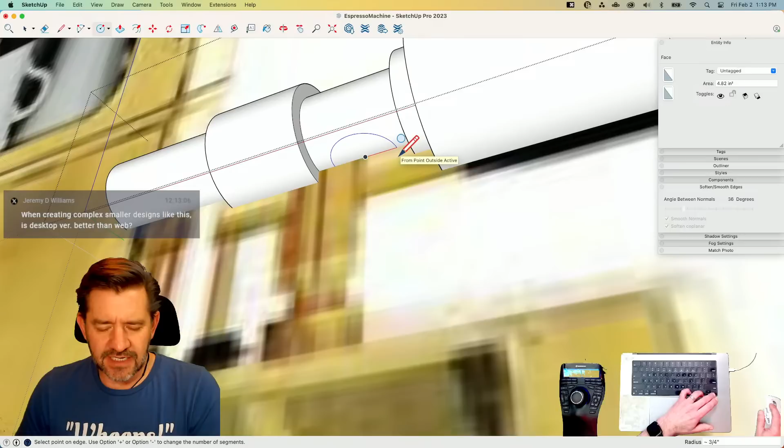I think one of the things I know I do a lot is temporarily group things as I model. I tend to model outside of groups and then put stuff in groups temporarily to hold them, like if I have overlapping geometry and that kind of stuff. I wonder if that's part of my mindset, I don't know, I'm psychoanalyzing myself here. But I guess part of me feels like if they're not in the group beforehand, I'm less likely to forget, or something like that.

That's a good question. So there's a bunch of potential reasons why that might be, since we don't apparently know.

One question here: when creating complex, smaller designs like this, is desktop better than web? I'd say Aaron's not modeling this at scale because of the small design complexity - he's modeling it bigger and then scaling it down afterwards. I think that would be the same whether you're on desktop or web, so I don't think there's a particular version you need to be using. He hasn't used any extensions yet, so you could do everything he did here on the web version as well, for sure.

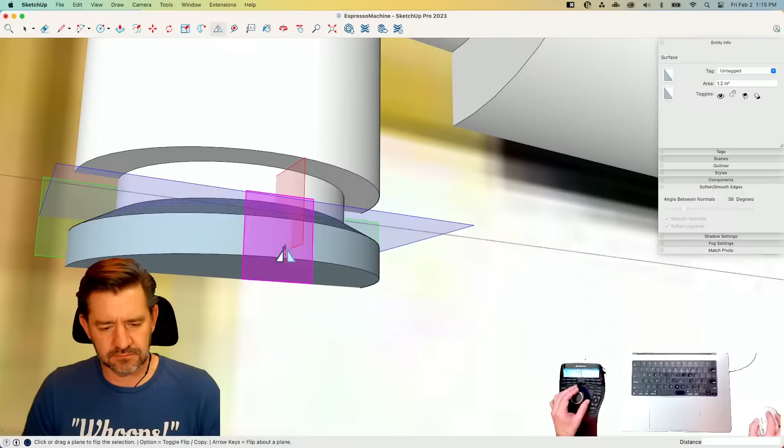I think the web version's awesome. I think we do tend to show this version more often, primarily because there is a point at which desktop is more powerful - it just is - and we stay away from those limitations by not going there. So yeah, good question though.

I'm just making a path right now that I'll pull a circle down for this steamer tube. And then, because I'm learning things right here, I'm going to make sure I weld this before I follow me. And then do just that - follow me. Boom. All right, now put a little nozzle on the end, and our steamer tube is done.

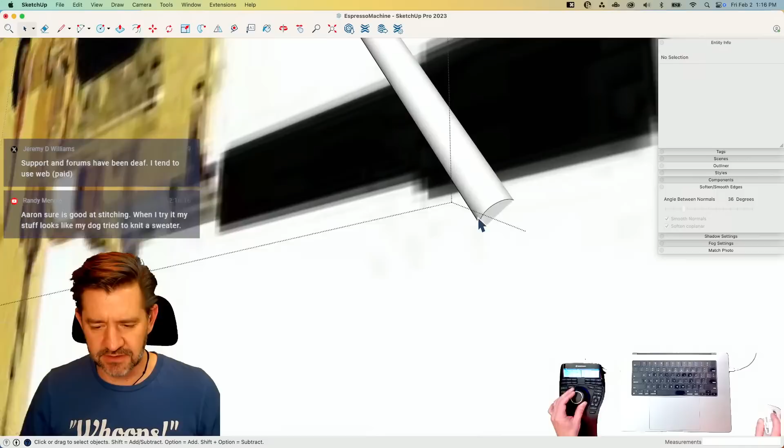I'm going to do the same thing here. I'm going to offset this like this, pull this... oops.

Jeremy, if you're having problems with geometry not forming because of a small face problem, I would say just model it much larger and then scale it afterwards. That would be my suggestion, without looking at the particular model you're using.

Randy says, Aaron, you are so good at stitching. When he tries to stitch, it looks like a dog tried to knit a sweater. I don't want to sell dogs short, but that doesn't sound positive.

Yeah, I get harassed a little bit about stitching because I do spend a lot of time stitching and I kind of enjoy it. It feels therapeutic to me, but I get why people don't want to do that. I understand it. So far you've talked about psychoanalysis on this stream, you've talked about the stitching being kind of your happy place. It's a lot of self-improvement going on this stream. Thanks guys, thanks for being my emotional support team.

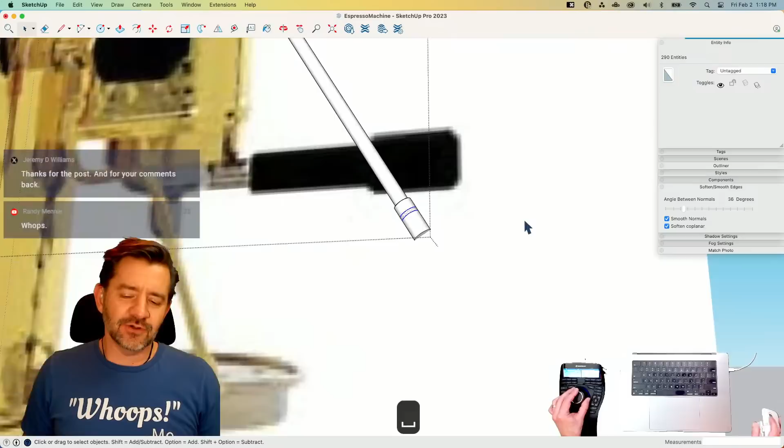All right, so right now I'm working on my nozzle here, but I want to take this piece and make it wider. I want to scale it. But if I hit scale right now, my scale handles are relative to the global axis, so there's a very good chance I could get some weird distortion in different directions. So I'm going to temporarily align my axis to this geometry, and I can put it back later.

If I come up here and go to Tools, click Axes, and click right here, right where this nozzle meets, then pull that line up and click twice, now my axis is going that way. So now if I grab this ring, trying to get just the ring, let's see if we can do that. Got it. Now if I hit scale, see how everything aligns to it?

Because that's how I need it to be. So I'm going to grab this corner, hit Option to go to the center, hit Shift to uniformly scale. There we go. I'm going to do the same thing down here, scale that. There we go, little steamer nozzle on the end there.

All right, and that is that. You see that my box now goes this direction because I was inside context. I'm going to come in here, right click, and say reset - it's going to put my axes back at the world axes. And then when I come out here now - oh, it didn't change that. Reset. Huh, reset.

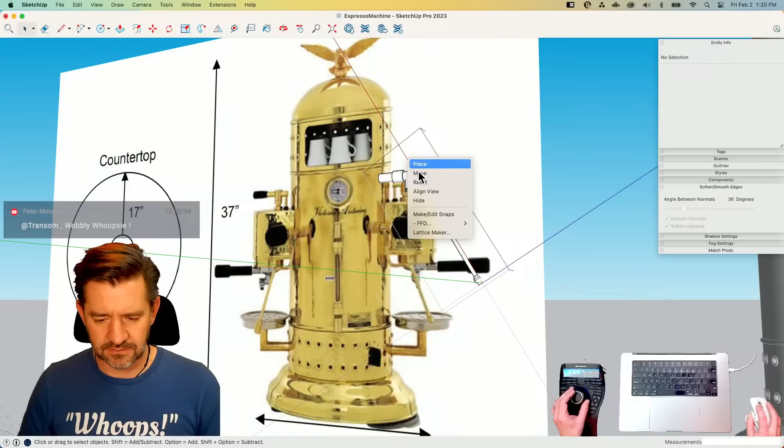Hey, what's going on? It's not going back. All right, well how about this, how do you like this? If I right click and say place it like that - what do you think about that, huh? There we go, yeah, take reset - that didn't work. That's weird, but I know better than to spend the next 10 minutes trying to track that down. I'm making a mental note of that and will come back to it later.

All right, I'm going to take this piece - see it? Because I can learn, that's what I'm proving to you guys. I'm going to put it right there, drag it down like that, then drag it straight over. So it's just - I need to hide this temporarily. Oh no, it's perfect. And then I'm going to take that.

I'm going to rotate that from my - let's see, my hidden geometry - middle here, and bring it around right there. All right, unhide this, get rid of those, get rid of all those dotted lines. Oh, it's all coming together guys, it's all coming together. Very good.

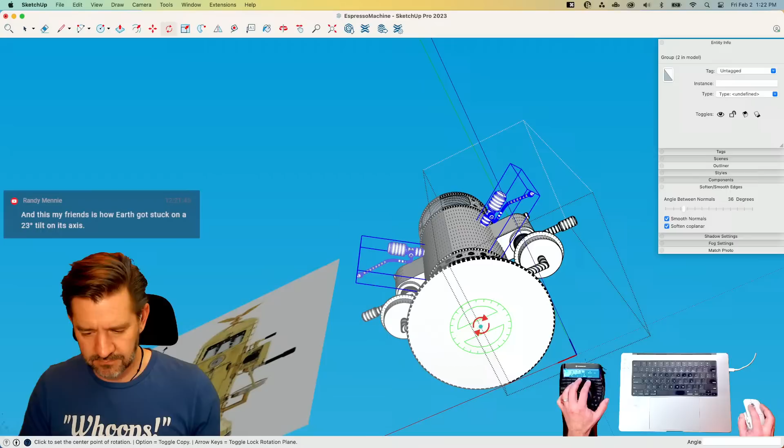All right, now that I've got these three pieces, I'm going to Command X, come into context, edit, paste in place. This is not in the right place - hold up, I need to rotate that in a little more. That's closer. All right, ooh baby, it's happening, it's happening. All right, big things I got going still here.

We got our little steam thing, steam or pressure gauge, and some pipes happening here. Yep, a little thingy, switchy thingy - sorry, I hate inundating you guys with technical terms, I apologize. I can't find that on the drawing anywhere either, so maybe I'll skip that. I don't know, this is what we're - this is what we're switchy. Okay.

Yeah, I'm looking to see if I can find any clearer image of this, and I don't think I can. So, designer makes the call, make it up. All right, absolutely. Which I like. I like it.

All right, I'm gonna start with a circle. Bring it in the middle of this pipe. Bring it out to the pipe width. It's gonna go up to there, and it's gonna come down to here. We're just gonna do some stuff like offset, you know, we used to do.

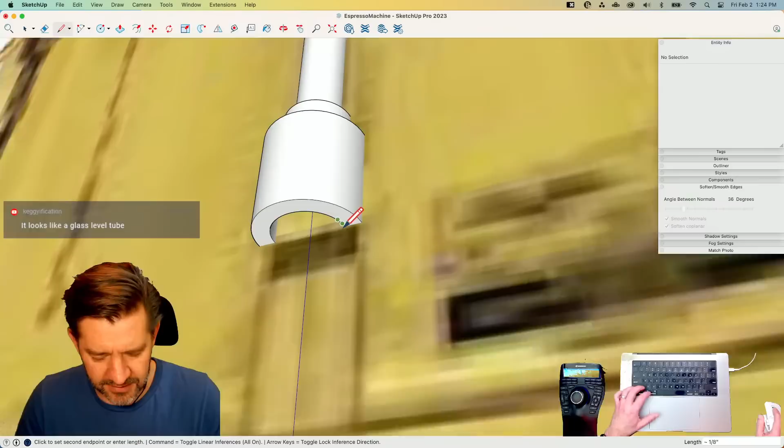Actually, you guys should tell us if you liked them, because we could do another set of them. We used to do these machine drawing modeling scenarios, where we would take like a CAD drawing, a dimensioned CAD drawing, and we'd go in and draw it, model it up in 3D. That was a lot of fun, a cool one, a lot of fun to do. It was similar to this, but we were doing it off of very exact drawings.

I feel like I got the spirit of that happening right now without any of the actual precision happening. I'm not actually being terribly precise with this. You got the 17 inches, that's right, there's a number, but that's about it. Yeah, so we'll be precise at some point, a little bit precise, precise-ish. Is that a designer term? No, I personally love those streams because it's definitely a mix of the precision and getting the exact numbers in, and entering exact dimensions, mixed with how your mind comprehends it. Different people have different strategies when modeling that kind of stuff, of how you would go about bringing those exact pieces to life. So I, for one, like those streams.

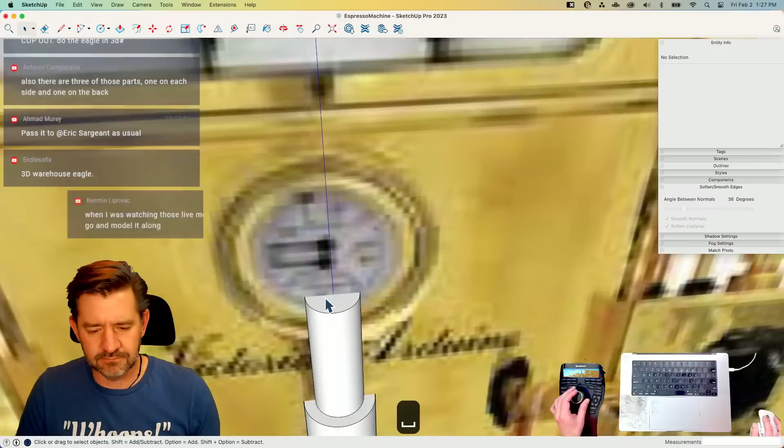Yeah, to me, the eagle kind of has a different feeling or connotation maybe than it did in the 1920s. It feels kind of militaristic or something, and I could do without it. I can see that. Ahmad saying just let Eric deal with it, which is always a good plan. He's somewhere going like, what's going on? Why am I feeling so weird? I feel so defensive all of a sudden?

We have a suggestion that 3D Warehouse might be a place to get the eagle. Yeah, so I don't know. I agree that the machine itself fits pretty well in the spot, which, if you didn't catch the previous stream, is the name that Aaron gave to the coffee shop this is going to be a part of. But I don't know, the eagle just feels like it's not really matching the vibe, in my humble opinion. I agree wholeheartedly. Eagles out, what's in, guys?

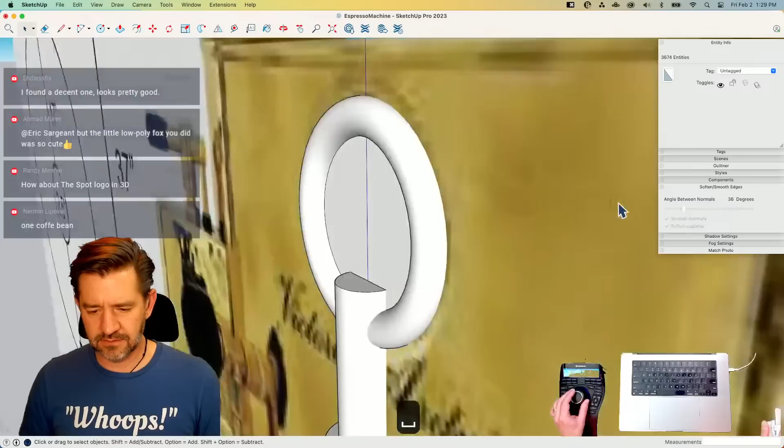All right, okay, cool. So there's our thingy. I'm assuming that this at some point connects back in here. So what I'm going to do is draw. Well, how do I want to do this? So I'm just going to have a pipe come out of here, and that will go back, tie back into, yeah. It's like that's the middle.

Disappear that into there, and then we'll do a circle right here. All right, and we'll just put that in like that, and then we'll pull it out like that, and then that, and then that, and then erase that and that. All right, there we go. And then I think I can just take that. Let's see if it's too big. It might be too big. Let's go that one.

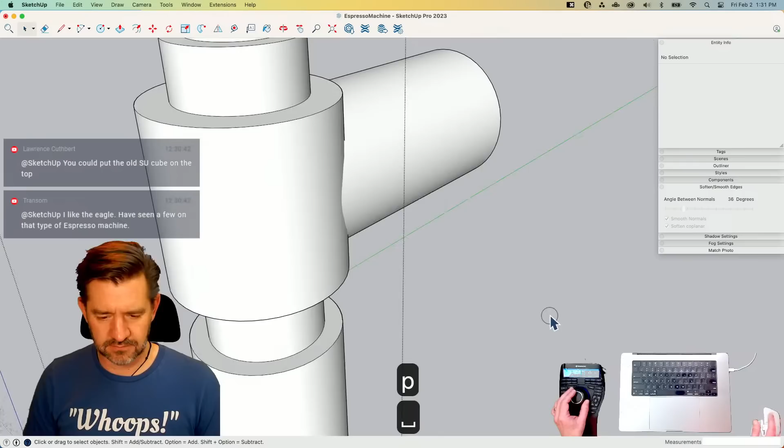There we go. Got a quick fix. Get her done, that's right. All right, so there we go. So that thing now can sit in here. I'm gonna do this though, I'm gonna come in here.

Set this back a little bit. You guys saw what was going on here, but there's actually two gauges, so I'm gonna come up here. Go like that, and then I'm gonna go like that, and then like that. Right there.

Man, this mirror command, I like it, I'm really enjoying that. Watch this, I'm gonna mirror this. Bing bong.

All right, that piece comes straight on over. We'll grab it from the middle of the group.

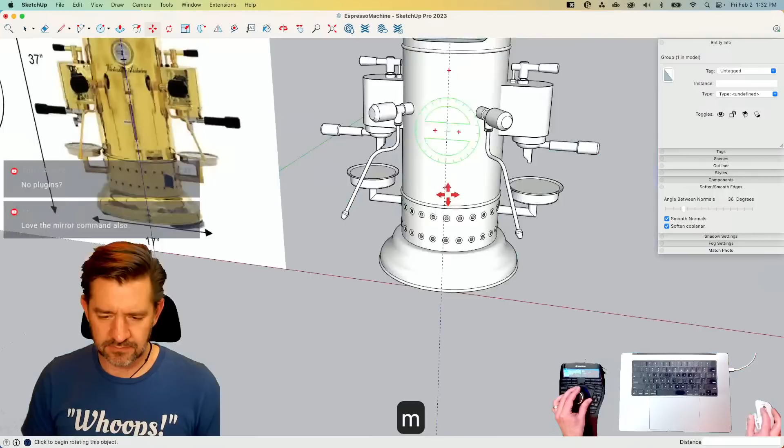What's the button to toggle? No, there we go. Got it from the middle. Bring it straight over, and I'm going to—where's the best middle plane? Probably. Now we'll just start moving it forward till it comes out, like that.

Bravo. Looking beautiful. Love to see it.

I gotta say, the chat is pretty much split on the eagle. Some people are really looking forward to seeing how you'd model the eagle — they like the look of it, they've seen espresso machines with that type of eagle on top and they like it. Other people are suggesting alternatives: you could put the SketchUp logo, like you mentioned earlier, or a golden bust of yourself. Eric suggests a low poly eagle, a coffee bean, the spot logo in 3D, or pulling some stuff from 3D Warehouse, like we mentioned earlier. Of course, these are all just suggestions for you, you have your own way of doing things, you're in your own driver's seat. People are cheering eagle, eagle, eagle. And then some people are asking about, did you use any extensions? No extensions used so far, this is only just base out of the box SketchUp.

And some love for the mirror command. And I'm just reading out the chat. Is the espresso machine Italian, Sven? Yes, it is. It is by Arduino, Victoria Arduino.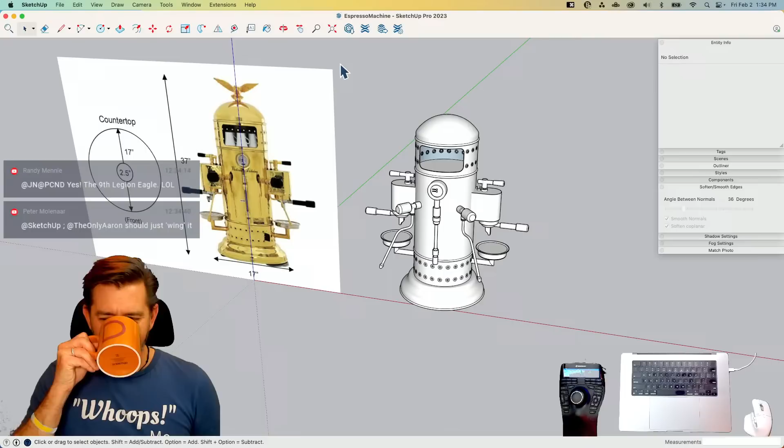It's called the... wait a minute, isn't Arduino the company that makes those little boards? Not the Arduino boards you're thinking of. Yeah, is that common spelling? But no, it's called the Venus, I believe, is the name of it now. Italian, originally from the 1920s I believe, and they're still around, you can still get them. They're all handmade, or most of the parts are handmade, so on the pricier side, but a nice machine, does the job. I find the shinier things are, the more expensive they're probably going to be.

Yes, mirrors, way up there. Oh yeah.

All right, well hey, let's—I'll be honest, all right, here's some things I'm thinking: it's 1:30, and I can't do this justice in 20 minutes. We could slap together a thing, but I'm gonna break with — this is not normally how I'd go about this — let's go check out 3D Warehouse. We don't gotta commit to anything, everybody relax, but let's go see what 3D Warehouse has to offer, let's just check it out.

All right, we're gonna go over here, come through here, Warehouse, and we will say... always good to be aware of all the different resources you have at your disposal. That's right, let's see what it says for Eagle. I'm just throwing it in, just boom, let's go — products and models.

Whoa, hello. That's awful close, and done. That's 47,000 — all right, wait, I want to see this, I do want to see where we ended up. All right, so we're about just under 100,000 faces for this. So this is about half the size of our entire thing, so not — which isn't saying we can't use it — I'm just saying I'm still trying to be a little conscious.

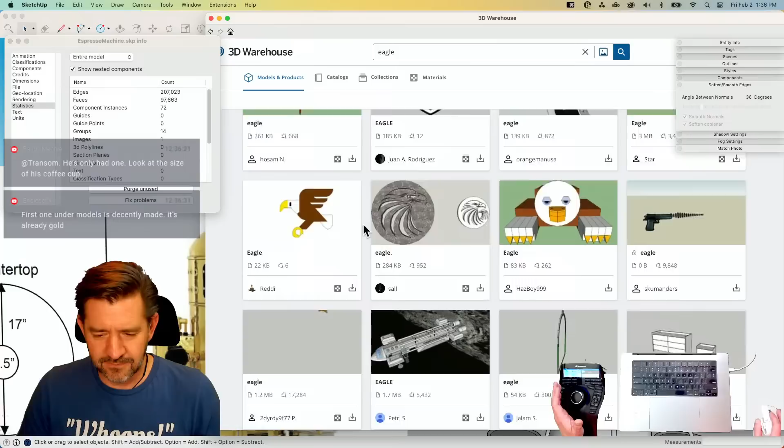That's a pretty good one too. As you look through these eagles real quick, I do want to say that I sacrificed my email and joined the mailing list of this company that makes these espresso machines in order to get the brochure of this thing, because I was very interested in this espresso machine. And there is a specific part that's about the eagle, which maybe will sway your idea of even putting a heavy eagle in here, because it says — and I'm definitely getting to that part very soon.

Legend has it that the eagle can look at the sun without succumbing to its splendor. In no way dazzled, the bird continues to fly higher than any other with its gaze fixed on the future. So if you want to be future looking, the eagle is your raptor of choice. So that's all I have to say about getting that eagle on top, baby. Well, I'm swayed, I think it's got to happen.

And this is why I like our group here, is because Endless Fix has already checked it out and done a quick evaluation and said this is a good one. So I'm going to go ahead and download this.

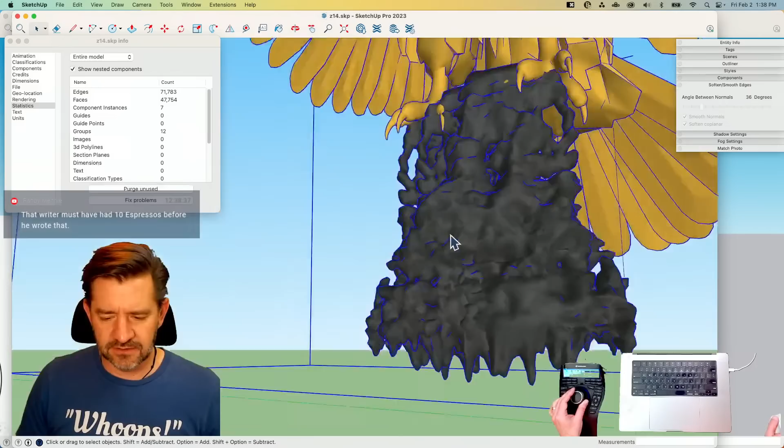Apparently this is a vegetarian eagle because he's carrying some kelp back to the nest. So we can get rid of that. And that's pretty cool looking. It is cool looking, I will agree.

All right, so I'm going to go ahead and grab that, copy it, and come over here. Command V to paste it. And there we go.

Anybody who's used the warehouse knows that it's a double-edged sword, because you can get some absolutely amazing content from there, but you can also get some way too heavy, way too difficult to work with stuff from there as well. So this one, this will work.

Obviously not to scale, so I'm going to go ahead and scale it. I'm going to hold option, scale about the middle. Looks like his wings go just about to the side there. I'm going to lean him forward a little bit, so I'll grab rotate and bring him up like that, and then bring him down, forward. I'm sorry, him, I shouldn't say him, I'm making an assumption. That's pretty good.

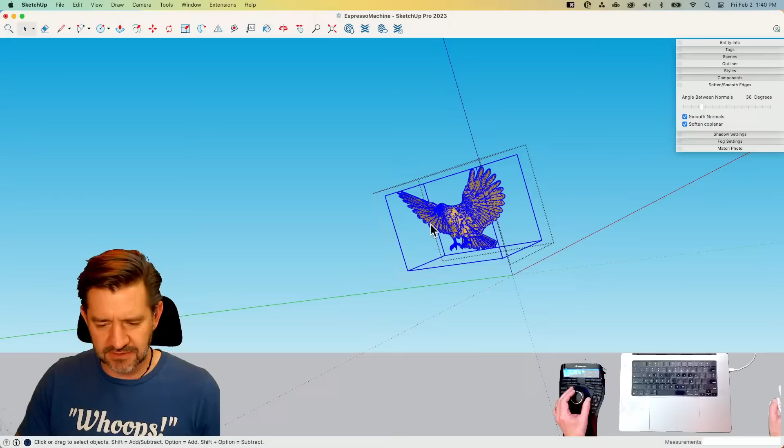Wait, back up, back up. It's in multiple boxes or multiple containers, and I don't like that. So I'm going to explode this out as many times as I need to get to just one container. I just want the raw geometry inside of a single group, that's all I want. Too much packaging is not sustainable.

That's right, you know, this eagle could be suffering in its natural habitat because of all this extra wrapping going on in this component. Funny job, Matt, funny joke. Okay, here we go, thanks for catching that. I didn't catch that, but yeah, this is a good one. Good one. Endless Fix saying the eagle has landed. Very good, love to see it.

This is coming together over here. We got a couple things going on here, we do some back faces. These feathers are all 3D, but they got geometry pulling through each other. This guy right here in particular, let's get rid of hidden geometry so I can just grab that, and then grab that, and then we'll reverse those.

So potentially a little more cleanup to be done. Nope, undo. So yeah, that maybe a little more on the precision side, right? For the render. Yeah, but before this is rendered, we'd probably want to do something else there. Maybe we'll just drop him down so he's...

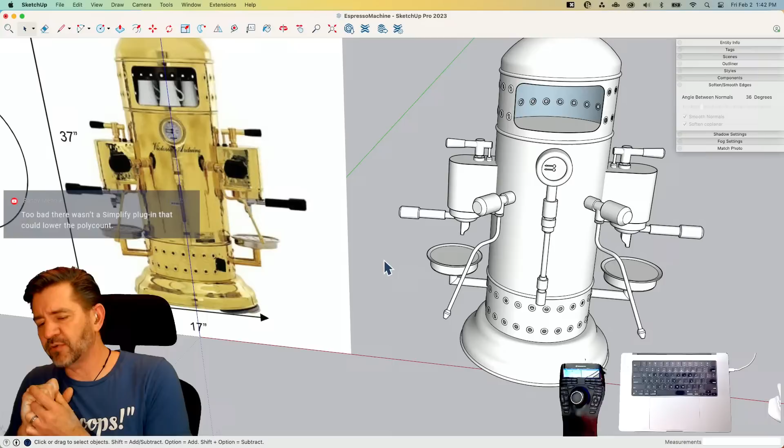Check me if I'm wrong, but the reason being is that when a renderer sees a SketchUp back face, it kind of interprets it in a certain way that normally is not the output you're looking for when rendering a model. So what can happen is it can see that back face and just basically ignore it, depending on the renderer. I think if Eric renders this he's going to render it in V-Ray, so I don't think he'll run into that problem. I think he will, if he renders it, I think V-Ray will render back sides the same as front sides, but I don't know for sure. He'll know better, so there may be some cleanup that has to happen.

If so, then we'll do cleanup if we have to. Basically, that's what I'm saying there. All right, so be it. Yeah, that's right. I'm going to call that done. Actually, I'm going to come in here, I want to try to remove this just because it's not quite fitting. I'm going to grab all of this and soften it, crank this up and see. I gave it a cool look with those shadows. All right, there we go.

Alright, one more thing. Time to fire up a double shot, get caffeinated. Boom, alright. Speaking of, done. Beautiful. Oh wait, no, you thought so. Wait a minute, just one second, because we got one more thing to do.

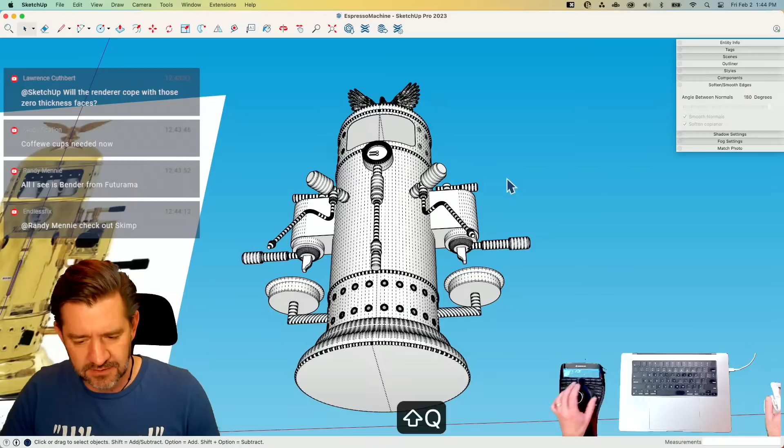Importing a bunch of geometry probably gave me some ugliness, so I am going to scale this thing using the tape measure. I'm going to measure across the bottom here to here, and I know that's about 17 inches. Oop, that's a foot mark. Inches.

Now we should be about 3 feet from the eagle to the ground. So let's see, 3'7". It's a big eagle. Yeah, we definitely ended up a little taller.

So here's where I'm questioning - this line right here is about 17 inches, this line right here is 37. So, who knew that the accurate dimensions I had on this drawing didn't work out perfect?

I'm feeling pretty good. Yeah, it looks beautiful, it's going to look great in the spot. People are going to be coming from all over to get a fresh cup of coffee, the creamiest cup you've ever had, because of the verticality - espresso machine, of course. Yeah, embarrassed I even had to say verticality, that's my Bill Raftery impression. Not good, but it's definitely a highlight of our coffee shop we're starting up. If anybody wants to be an investor, let us know.

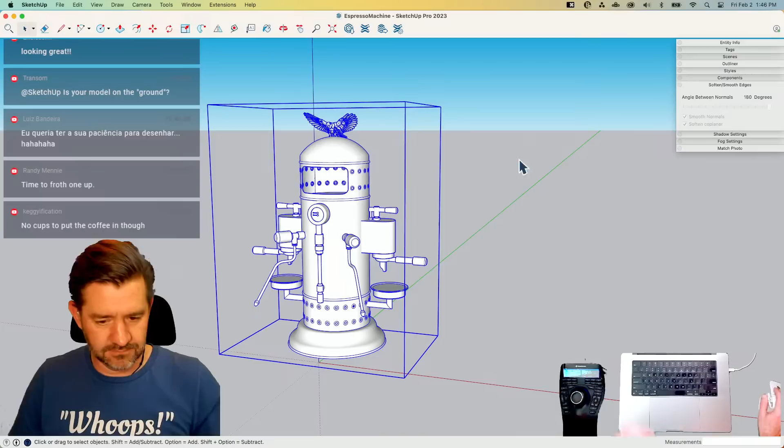We noticed there's no cups in there like there were in the picture, and it could be because you took all the cups. We've had some comments about this but didn't want to interrupt earlier. But you seem to have many cups you've been drinking out of today - is that true? I haven't noticed that. Yeah, that could be. You might have took all of them - different cups here. I was wondering how long it takes somebody to figure that out. I've been cycling through them through the whole model.

I started with this nice stoneware cup right here, and moved through my initials with my A cup and my D cup. Then I have my old logo cup, lovely, my current favorite my Stay Rad cup, and nobody mentioned that I was drinking from a mom cup, but I did.

Love to see it. Good catch, guys, that's where all the cups went. I think some eagle-eyed viewers, no pun intended, did spot that earlier, but good for you - I give you very many props.

Alright, and that's looking great in there. That's it, props in, people in. Again, I'm not trying to really pass the buck, but I know Eric's gonna have a better idea of how he wants to color this.

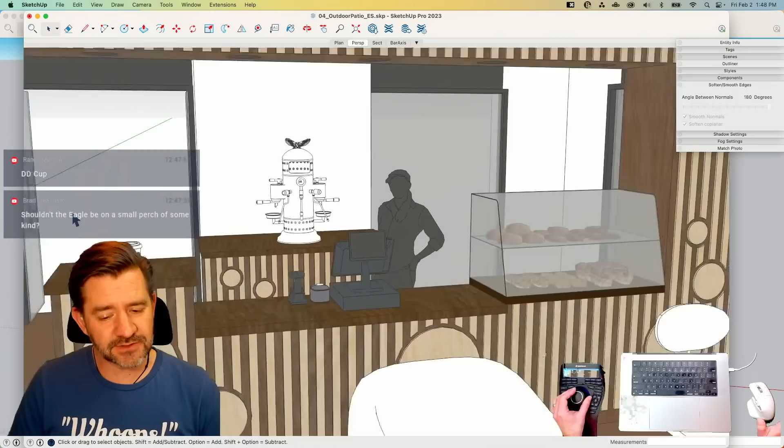I assume he's gonna use some render-ready or reflective materials on there, and that's an if too - I'm assuming we'll do a render, but it may happen in a video. He may just do it himself, I don't know, we'll see. But that looks good in there. I like it, I like it.

Let's see if I can keep - oh yeah, keep it right in the middle there. Excuse me. Nice, yeah, and I don't know if you have it installed. We did have a request to do a diffusion render, but that's up to you if that's something you want to pull out at this point.

Sure, let's save. Yeah, it does not like that eagle - there's something in that eagle that it's got an issue with, but we'll give it a shot. We got a couple minutes left, let's see, I hit diffusion.

Transom's asking if all your cups were full of coffee and if you drank all of it. No, I actually only had coffee in one - most of them were water. So a little behind the scenes.

Shiny brass espresso machine. You know what I wish I could do?

I wish I could type at the speed that people in movies do, because they just kind of talk at a conversational speed and keep typing, and I've never been that good of a typist. Being able to carry on a separate conversation and type at the same time - yeah, I really have to focus to do as many typos as I do, and I can't go that quick. So hard.

All right, I'm gonna keep it simple. We're gonna generate and just see what we come up with, and then we will call it.

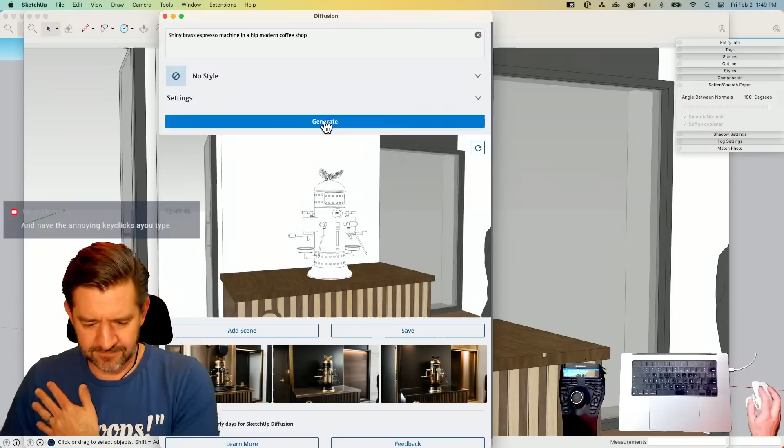If people are not familiar with what this is, it's a new extension that's free if you have a SketchUp subscription that uses AI stable diffusion rendering to basically take the image of your geometry, your model, and then generate an AI generative image.

As you can see, it's just kind of guessing at the materials and everything. Obviously, what he put up didn't have any materials.

Some cool, good looking results. It did go in, look, the first thing it did is dropped the detail here. Get us a nice mushy eagle. Ooh, black eagle. This is the limousine version.

This is the high end. You gotta pay extra for this guy right here, the black eagle on top. Luxury. This one's got a bedpan hanging above it, so that's cool.

The eagle just got totally swapped out for a big chunk of metal. I could have done that in Photoshop half the time.

Well, I gotta say, if there's a preferred one, it's this guy right here. It looks pretty good, I like it. Yeah, that's a cool one.